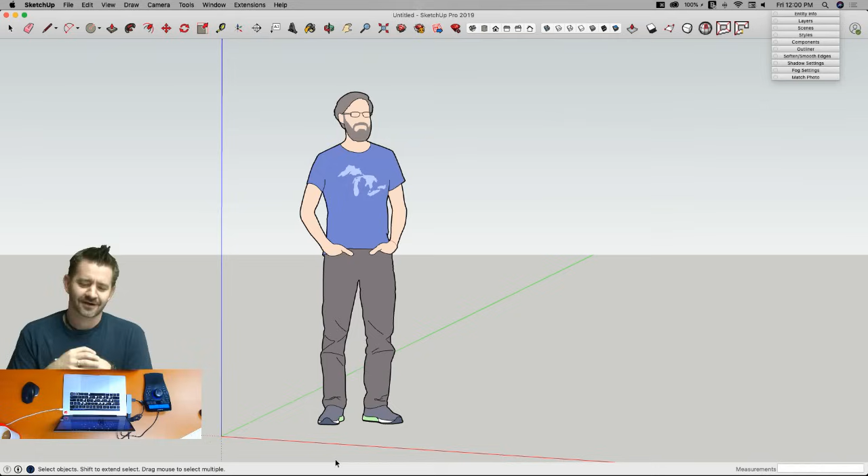Yeah, I did my best to. You guys have been around for a little while, know that we used to do this with Matt, who is actually on right now, so I'm gonna make him blush. Our video Superman, he would set all this stuff up for us. I would just walk in, plug my laptop in, talk a couple times so we could check levels, and we'd be going. Now I have to come in here two hours before and set up all the stuff Matt did, and I miss Matt. We all miss him. Yeah, and then I managed to accidentally break YouTube streaming, so I don't know what I did. I did something so it stopped streaming to YouTube for about an hour, but it's back running now, so that's the important part.

Awesome. So, hope everybody's doing good, this is going to be fun. We're going to do some stuff now. Today we're going to talk about furniture. It's a pretty broad topic, so I'm going to need your help. Furniture can be actually, so here, let me just show you this.

I did my research, and I went in here, and I searched furniture on Google, and it turns out there's lots of pictures of furniture up on Google. Apparently beds and couches, those are furnitures, tables. There's lots of things that qualify as being furniture.

So what I need you guys to give me some input is what type of furniture we should do. My thought was kind of a woodworking thing, and I don't know if you guys saw the thumbnails. We grabbed some cool shots of some different types of furniture, some stuff that was like wardrobe or desk, something with some ornamental woodwork on it. That was kind of the direction I was thinking, but I wanted to hear what you guys think.

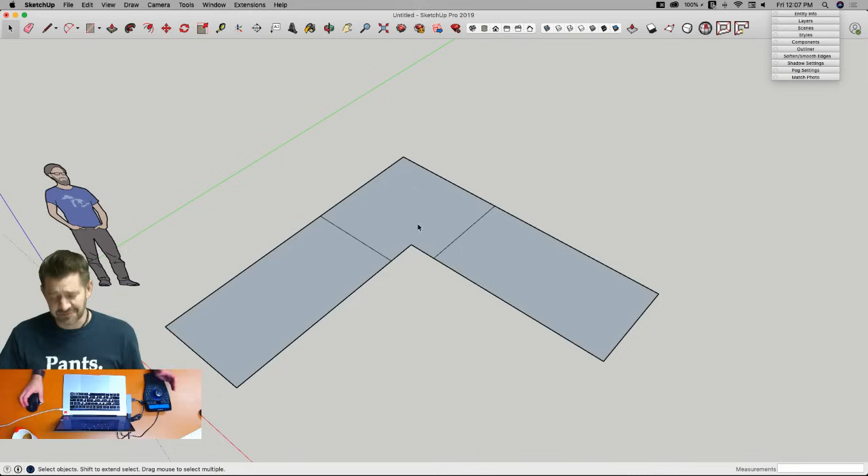So I'm going to start by getting my arc in here because I want to get this a perfect circle. So rather than using the standard 2-point arc, which is the default, I'm going to use the standard arc and inference this point to do a perfect arc like that. Then I'm going to use that command again to grab those same points and again do that arc. So that's my middle section.

All right, I'm gonna double click right here and I'm gonna start by making that a component. I'm gonna double click over here, make this a component as well. And I'm gonna call this my side section.

And, because I wanna try to do things a little different than my standard workflow, I'm gonna save this to my desktop as - think outside the box - I'm gonna call it sofa.

Nice, yeah, I try. All right, so that means I'm gonna get rid of this over here. I'm gonna take this piece and make a copy. Now, I wanna be very conscious of how I make a copy because I will have to rotate 90 degrees.

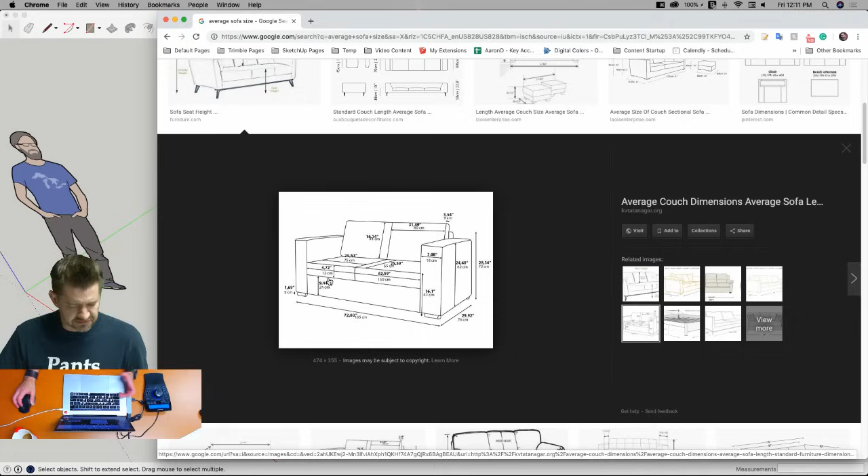So I'm gonna say the bottom section is about 9.5 inches tall. That seems about right. So I'm gonna come in here and push this up 9.5. I'm gonna double click into this one, bring it up instead of down. All right, so got our sofa started.

Now I'm gonna double click or triple click this because I'm gonna make this a separate component inside the component. As I go through and build this, there's actually gonna be separate pieces that make this up. Depending on how I put the whole thing together, cushions might be separate, the arm might be separate from the seat, separate from the back. I'm gonna want control over how that geometry grows, because SketchUp is gonna try to stick together whatever geometry connects. So I'm gonna do my best to isolate these until there's such a point where I want them to join together. So I'm gonna take this one and say make component, and I'm gonna call it the...

Bottom of side. It's like secret code. I know what it means. All right, so that's what that's gonna be for right now.

Let's check my dimensions again. So the overall height up the back is about 28 some inches, minus 1.5 inches or so for legs. So I'm just gonna draw a reference line here and go up 28, and draw a rectangle on top of this piece. That is, oh, you know what? This doesn't really make sense because I didn't actually set a size for any of this other stuff. Got a little ahead of myself.

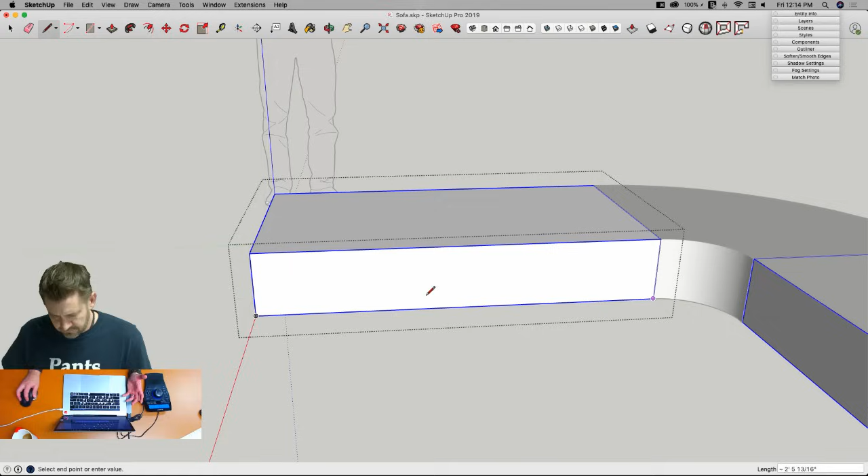All right, so there we go, so now we got this the right size that way. Length this way, again I just kind of arbitrarily made something a certain length. So this says it's about 6 feet. I have it at 4'9". Let's go ahead and make it an even 5 foot. And I will come in here and pull this out to here.

By the way, Anita says she has a lot of practice in rendering, so if we need any help, she's here. All right, I got backup.

So now we want to go up, what did I say, 28 inches? That's how big the back of our couch should be. So I'm going to draw a rectangle that is 5 feet by, here's what I want to think about, how deep is a seat? A seat is about 25.5 inches.

So if I come here, I'm drawing outside my group, so I'm actually drawing lines sitting on top of the group right now, just so I have all these reference lines sitting around outside. Once it's time to clean up, I can temporarily hide my actual groups and get rid of all these free standing lines, or use something like clean up, but I'm intentionally drawing outside of my container to create these lines for reference.

So if I make this 25, I already forgot what I said, 25.5, that's right there. So if I draw a rectangle like this and bring that straight up to here, that's the back of my couch.

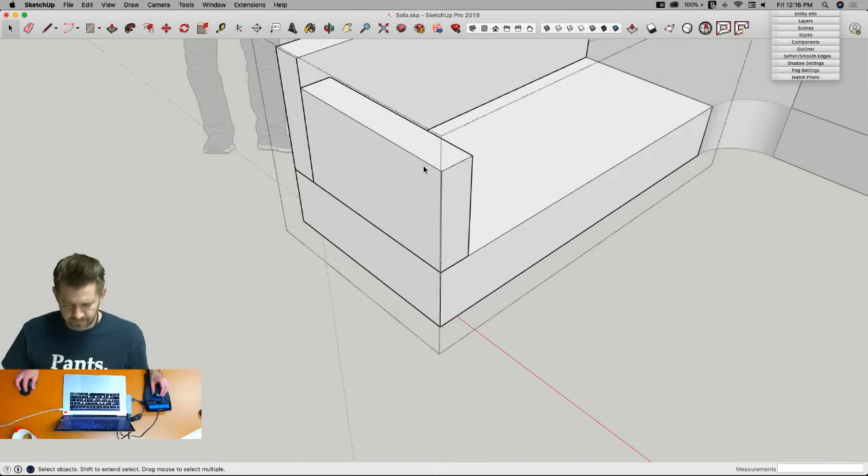Triple click, make that a new component, and call it arm. There's no arms on the middle section, so I don't have to say that's part of the side. All right, so there we go.

Now, you can see, if I come all the way out here, this is the issue I was talking about. I just grabbed that rectangle and plopped it over here. Obviously, this is not gonna work real well.

Well, actually, I've seen stupider looking sofas. This could actually work. People here face this way, people here face this way. Maybe this is like in a lounge or a public place meant to encourage, you know, I don't know.

Oh, Steven says, save please. Ah, dang. Good call, Steven, you know me so well. He does.

All right, so we got to flip. So a couple things have to happen here. One is I'm going to use move. When you use move, you get these little rotate keys. So I'm going to just grab this plus right here and flip it around 90 degrees or 180 degrees. It'll snap right there. And then I'm going to use scale.

Scale, I'm going to hold down the modifier key option and just scale it to -1. Now that is the same component, so if I come in here and start moving stuff around, you can see those two components work together. So I'm good there. All right, now everything's wonderful.

One more piece here, I gotta get it back. Looks like something's not quite lined up. I think that was all me. Everything else looks good. Everybody else lined up? Yeah.

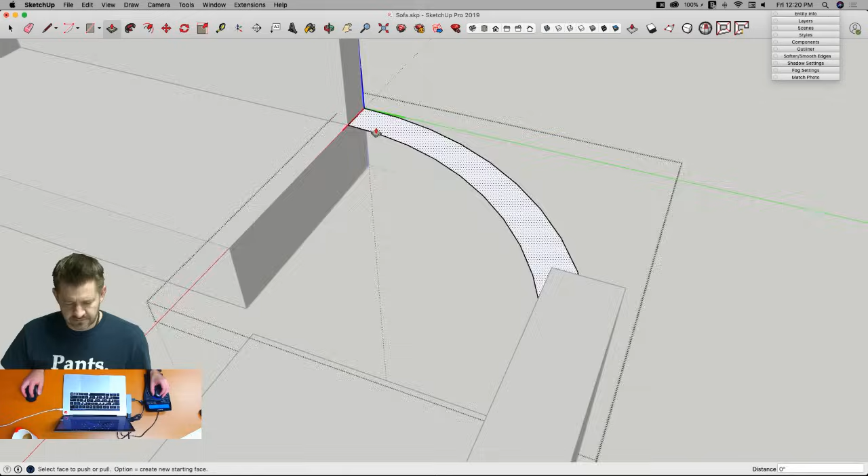So at this point, I'm gonna do this too. Oh, I have my shortcut key to hide everything else. So if I look at this welded, all the walls are separate, or all the lines are connected. So if I want to break it, I can just redraw over the end lines like this. And that will actually break. Didn't work, I lied.

If I draw lines like this, will it break it? There we go. To break that curve, because right now it's one continuous curve. So I draw those extra lines out there to break it, because I do, at this point, as I pull this up, I do want a sharp corner here and here. Not sure what happened there.

All right, so I can unhide everything else, and I can pull that up to the same height. Now I can also come in here and edit, unhide that bottom piece I just hid. All right, so now I have my basic section. So these are the initial pieces of the sofa.

So right now is where I'd make the decision of how much I want these pieces to be separate or joined together. If I wanted this to all be one piece, I could come in right now, grab all three of these, right click, and explode them. And that's just gonna give me one big piece that is the outside of the sofa. Depending what you're doing with this, that might be the ideal solution.

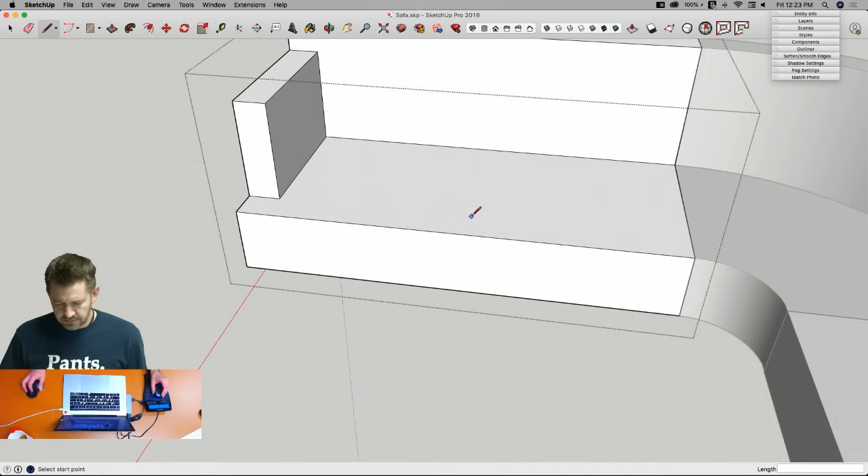I'm going to use a line on this. So I'm inside my component, again, my outermost component is the whole thing. So I'm going to click in there once, then triple click. This is all my merged geometry. I'm going to right click and say make it a new component, and I'm going to call it the side main.

I guess. And now I need to make a base for where my cushion's going to be. So I'm going to go in the middle, and draw a line straight back, and just make a rectangle like that. And I'm going to pull that up 4.75 inches, then triple click, make that a component, and call that side cushion 1.

So that's one cushion. My other cushion is going to be a little bit different shape because I'm going to use, again, just trace around the existing geometry that is grouped separately, like that. I'm going to push, pull it up to here, triple click, and make that a new component. I'm going to call that side cushion 2.

You guys probably saw that one coming, huh? I know, sometimes I get a little overly creative. All right, that looks okay. Again, we're still blocky, but I know you guys have faith. We'll get that worked out.

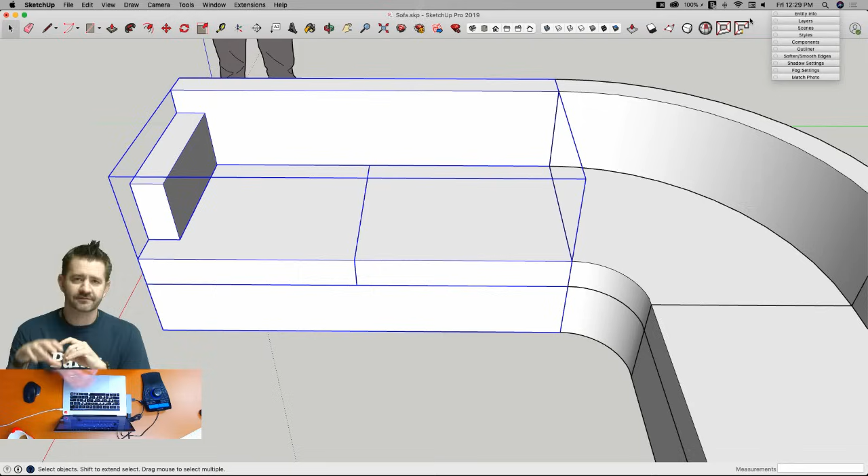I can't do that on Mac, I only have this one toolbar. So what I end up doing is putting in the commands I use a lot - my native commands I use most often, my view options, and then extensions that I use a lot. Actually one of these isn't an extension, that's push line, which lets you push-pull a line into a surface. This is just shadows on and off. This is vertex tools, sub D, and solid inspector from ThomThom, and split donut and split sausage from TIG. These are tools I end up using a lot in my standard workflow.

To be honest, a lot of the shortcuts I have are mapped to my mouse or my 3D mouse, so I don't use these a whole lot. Most of the time I use them it's because I'm doing a video and want to show what an icon looks like, like the section icon. That's another nice thing about SketchUp - you can tailor it however you want. Your UI can be whatever works best for you.

All right, let's move on. So next thing to get on here is the question of cushions. I might have separate cushions on the back here, might be part of the back, but I'm going to put actual separate cushions on. So I'm going to come into this group and start with a 4-inch cushion here, pull that up - actually pull it up just past that, about 2 inches past the back of the couch.

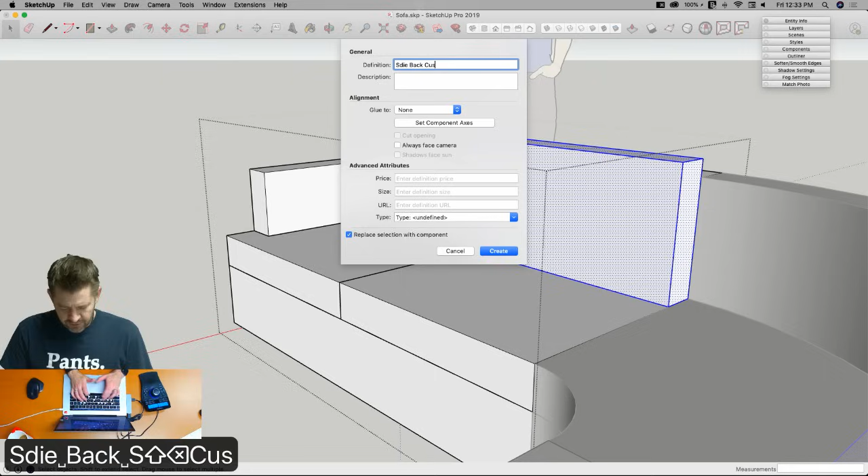All right, I'm going to triple click here, make this a new component, and call this side back cushion 1, or Sdie. I'm going to save, because I really am good at that. I'll come over here, use the side of this cushion to draw the profile of my next cushion, pull it out to the arm, and just to make this extra fancy, I'm going to draw a line right here to break that, and pull this out this way. All right, triple click, make component, side back cushion 2.

That's something most people do - toolbars are great, but most people end up using shortcuts. It's nice, especially when you're learning SketchUp, because there's nothing that beats an icon that does what you need to do. If somebody's just learning, I always recommend going to tool palettes, get the large tool set on, whether Mac or Windows, and have all your commonly used native commands right here. Once you get used to it, buttons are nice, especially with a lot of extensions, but you'll probably get used to shortcuts - assign hotkeys to whatever commands you use most often and just click those. It's hard to beat that way of working, it's a lot quicker than going up and hitting buttons all the time. So shortcut keys really are probably the way to work once you get past the startup and learning phase.

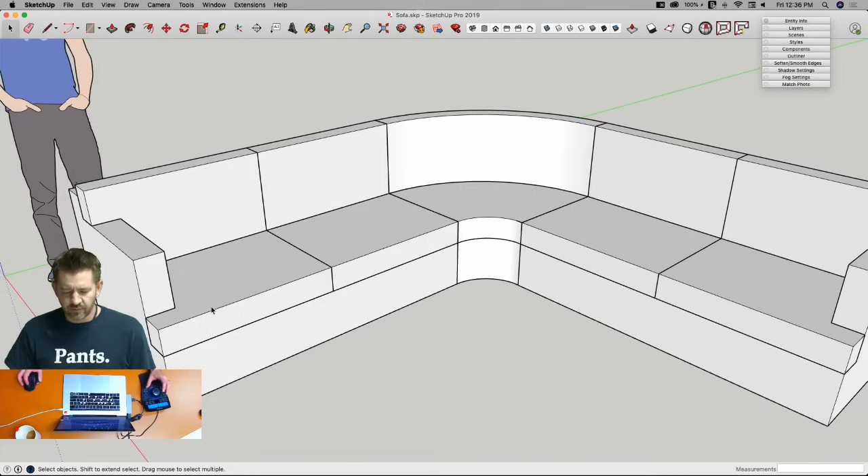So if I wanted some of this to look sharp, but I wanted the cushions rounded over on the edges, what could be good enough is to come in here with your eraser and hold down Alt or Control and just soften these edges. In some cases, depending on what you're using this for — because it really all depends on that — that might be good enough. See how I got that kind of rounded edge? It's not good enough for us, but depending on what you're using it for, if this cushion or this couch is going to be seen from right here, that's probably enough. I probably don't have to add a whole lot more geometry to this if it's going to be the size of a thumbnail on a drawing.

So I always advocate for modeling for whatever you're actually using.

I'm going to undo a few times to get our edges back, and now we're going to actually go in and talk about some extensions. I'm going to go up here to View, Tool Palettes, and turn on Fredo Corner — it's called now. There it is.

Fredo Corner is an extension from Fredo6, the extension developer, and what it does is it takes geometry and, like it says, rounds the corners. Natively, this is something you'd probably do with a follow me tool or something like that, where you take a round profile and use it to subtract from the geometry of the cushion, and that works. But it gets more complex when you're looking at corners. Like this right here, if I did a follow me around this corner, I'd cut that top corner off real nice, but bringing this corner down and softening that also becomes more work. So you end up having to delete geometry and maybe draw new geometry, create a bunch of pieces, stitch them together, or even end up lofting the corner together, something like that. So we're going to keep it simple.

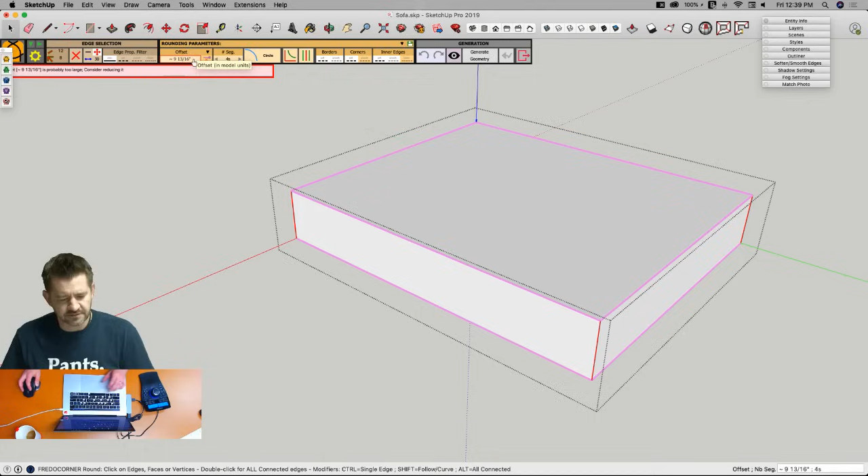And it's going to ask me now, how far do I want to offset it? Right now I'm offsetting 9 inches. That's too far. So I'm going to try 1 inch offset and see what that looks like.

We do have some options in here, number of segments I want to generate. The more segments I put in there, the softer and rounder that corner is going to be. Right now it's going to do 4 segments. That's fine for what I'm thinking I'm going to use this model for. If you know for a fact that you're going to do some high quality renders, like product visualization, you might want to go for higher than that, but that's your call.

There's a bunch of other stuff in here, honestly, there's so many options that I have a hard time remembering what everything in here does. So if you do want to use Fredo Corner, go ahead and give it a shot and try some of those different buttons and things. Right now, I'm going to go with just the standard default information in a round corner.

So we have a couple of questions about leather. Can you add texture like leather to this? Yes, absolutely, short answer, yes. You can add a texture of anything you want to add. I always recommend, if you can, getting a seamless texture, because then you can tile it and resize it to whatever size you want. If you can't get a seamless texture, then get a texture of an image that is bigger than whatever you want to put it on. So here, if I wanted to make this a leather texture, I'd want to make sure I had a piece that looks good when stretched larger than this piece right here.

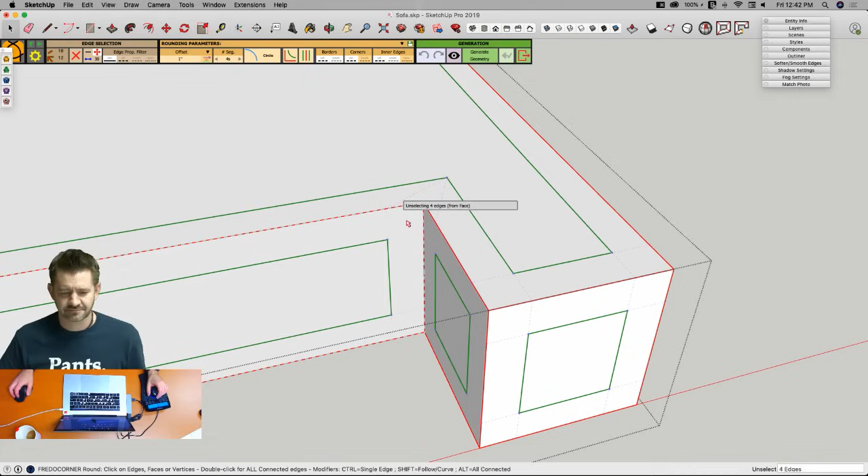Manually going through and connecting how these multiple... we keep flipping to offline on my screen. That's weird, we losing the internet? Is anybody else, am I disappearing, or is Restream just messing with me? Looks like we're still online everywhere, but Restream keeps telling me we're offline. You guys are still talking, so I assume it's not too bad.

According to Twitch, we are good, we are live, okay, and YouTube. See, Facebook up, Facebook's still good too. All right, I'm just gonna keep going.

So this is not the most beautiful here. I'm gonna look at my hidden geometries to see. So it's not bad, it's not a bad geometry, but it's a little bit chunky. What it's doing is kind of trying to soften that corner, again, with all the different sides coming together. So I'm gonna leave it, I'm gonna see how it interacts with this once I soften this too. But there we go, that's looking good thus far.

I'm gonna do the same thing to these top cushions. Just triple click, round corner, good, exit, triple click, good, whoops, triple click, click, click, now good. All right, so those look all right.

Now I'm gonna come into this piece right here. I probably wanna be a little bit more selective, I don't wanna soften everything. So remember, if I triple click, I'm just gonna do it. I'm gonna say, go for it.

So what it's going to do is on all these inside corners, it's going to come in and soften them, cup them together like that. My outside corners are all going to be on the outside. So the question is, where do I actually want to soften that geometry? There's some spots I probably don't want to do that. Inside corners I probably want to keep sharp, since they would actually fold inside.

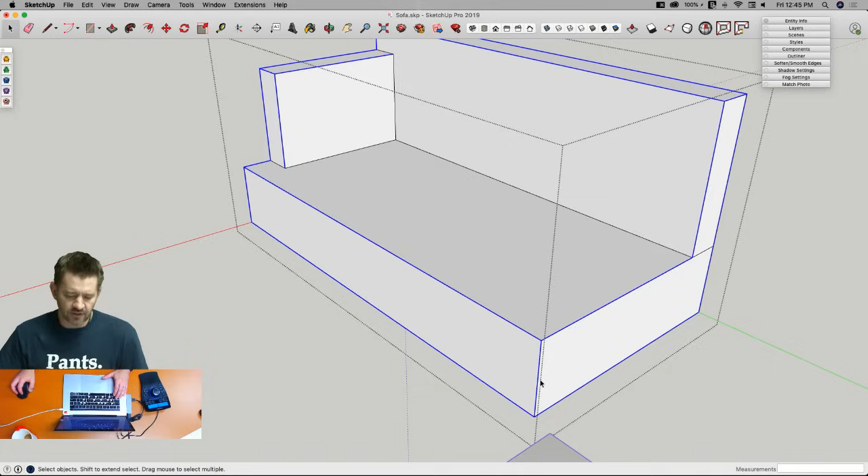If this is all one piece, I may actually want to turn these off so it has a nice, smooth, flat connection with the corner piece. So I'm going to turn those off. And I'm actually going to turn the bottom off too. I want it to be totally flat on the bottom.

I don't know what I'm doing. We got another celebrity status online. Don't get too nervous, Aaron. It's Josh.

Great, all these guys are going to tell me what to do.

All right, so now that I've filtered my selection, I got my inside corners turned off. I got my end and bottom turned off. Now I can hit round corner, and I can view again so I can see where it's going to round the corner. So this front corner will be rounded, and this will be rounded up here.

That looks good. I'm going to go ahead and hit it, then exit, and click out to see how that looks with my cushions. So yeah, I kind of like that. I like the way that looks. So round corner rounded this piece like that, but left it flat on the bottom. I think that looks good.

If I want a little bit of a lip under there on the bottom, I could come through, click in here, and do another round corner, maybe rather than a whole inch offset, do like a quarter inch or something, just to give a real small, tiny lip. Something like that could work, but I'm going to go ahead and leave mine just flat.

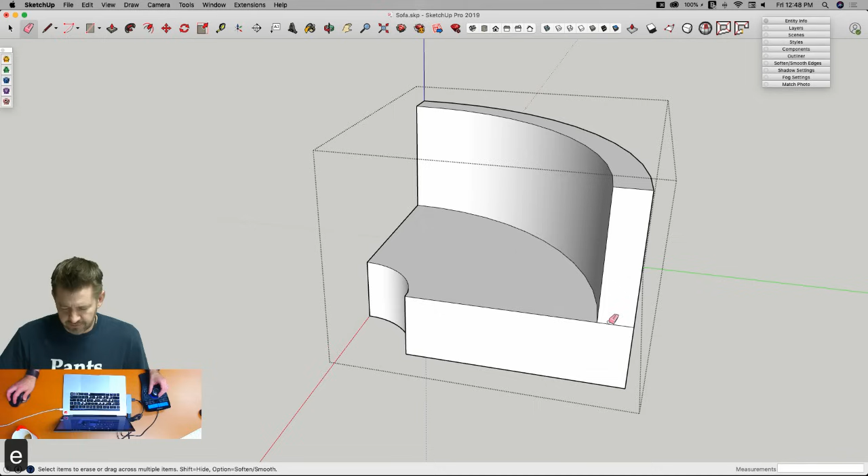Leave that, and I'm going to go into the geometry here. I have these extra lines I forgot to delete out. Actually, I'm not going to triple click because there aren't that many pieces that are softened or going to be rounded over on this one. I think that's it, just those pieces, so I can just select them instead of doing a big group select and deselect.

All right, what's going on here? Oh, I must have had some loose geometry somewhere. I rounded the corner, pulled back, and left that piece for me.

All right, so that is our about an hour sofa. No, not even, sorry, about a 40-minute sofa.

So I know one of the questions was about materials, how do I put materials on here? So let's take... oh no, I'm sorry, I forgot the cat toy and change storage. That's the most important part, right? The couch - oh look, I got the extra line here too.

All right, so we'll come under here, and I'm gonna draw just basically something pretty simple. Let's see, I'll come across from here to find where those two meet, and I'm gonna draw a 3 by 3 inch square, which I'll pull down to... what's my reference photo say for that? All right, so we're gonna say 1.5 inches.

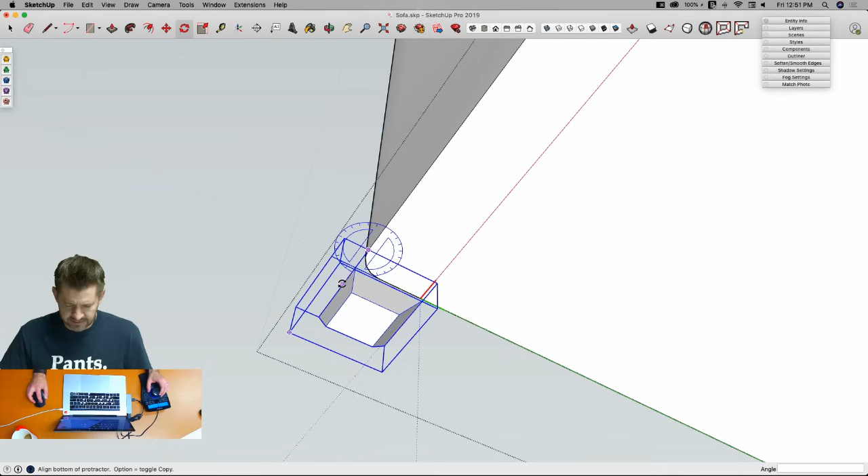And I can take that, and I'll use Move, Option to copy. I'll put one right here, and then rotate that 90 degrees. Grab both of these, copy over here. This is another one of those spots where there's probably a dozen different ways I could copy these feet over.

But that's my 4 feet. I'm gonna come in here, grab one - I have to Control C. I can't use modify or the move key to put it on the other piece, the middle piece, because it's out of context. So Control C to copy.

Then when I click into this, I can hit Control V to paste, and now I can grab it by those handles. There we go, stick it right here, and rotate it 90 degrees there.

Right here, and I can take that, of course, rotate that 90 degrees. And one more - actually, I wonder if we would want a 5th foot on the back here. Is that gonna be tippy? I'm gonna tip back. We'll throw a spare foot in just for fun.

Grab this foot, I'll grab it by the outside corner. I'll go find the middle of this arc, and I'll rotate it, let's see... oh, 90 degrees. So there's some feet - looks good.

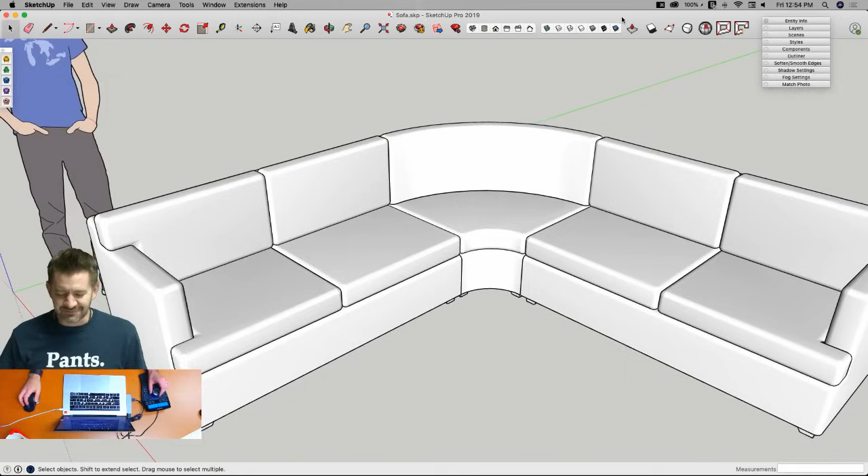But we'll go look at some tufting, because if I was to do that, here it is. I gotta talk like I'm not making excuses while I make an excuse.

Absolutely, that would be awesome. I wouldn't want to try to do it on a round thing like this on the fly - I would have to spend a little more time. But we'll make a separate cushion, a nice pillow that has a button in the center and some tufting. Perfect.

So the other thing I want to talk about is how to put materials on here. There's a couple ways I could do this. I'm gonna get down to the surface level. I don't want to apply materials to a container or a group on the outside. When I apply materials, I want to apply it to the actual surfaces. It will let me take the paint bucket and apply materials onto this surface, but that's not what I want to do.

What I actually want to do is apply it to the surface here. One of the big reasons is we're going to go in and modify and edit the texture. You can't do that when the texture is applied to an entire container. There are other downstream parts that can bite you, but the most upfront issue is I can only edit textures if they're on a surface. So that's exactly what we're talking about right now, editing textures.

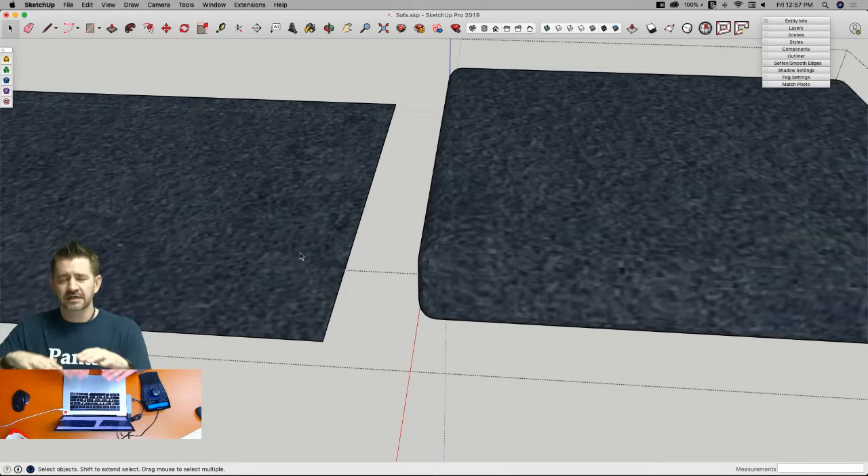This is the issue. What happens by default when you grab a bunch of surfaces and hit paint bucket and drop it on there: it takes that material, puts it on one surface, then goes to the next surface, takes the material, puts it onto that surface, and works its way around the facets, like the rounded corner. Each surface gets its own separate one. So each time it does it, the texture starts over, moves over, starts over from the same spot. You end up with jagged looking chunks going down the side.

Not ideal, right? So what we can do instead is take this material, right click, texture, and call it a projected texture. A projected texture behaves a little differently, because rather than each facet on a curved surface getting its own, like an image on a projector, it actually casts it from one direction. Watch what happens.

I'm going to triple click again, hit B for paint bucket, sample this projected texture and apply it here. This is a double-edged sword, which we'll see right now. You can see, looking at it from this side, it's the same texture all the way. But what ends up happening is on the vertical side, it's stretching it—projecting it vertically down—and it ends up stretching down like this.

So in some cases, depending on your texture, that might be okay—I might have a texture that actually looks all right with that. Oh, this texture looks terrible. Oh, that looks horrible, like an asphalt couch. Yeah, I don't know about that, but we're gonna roll with it though.

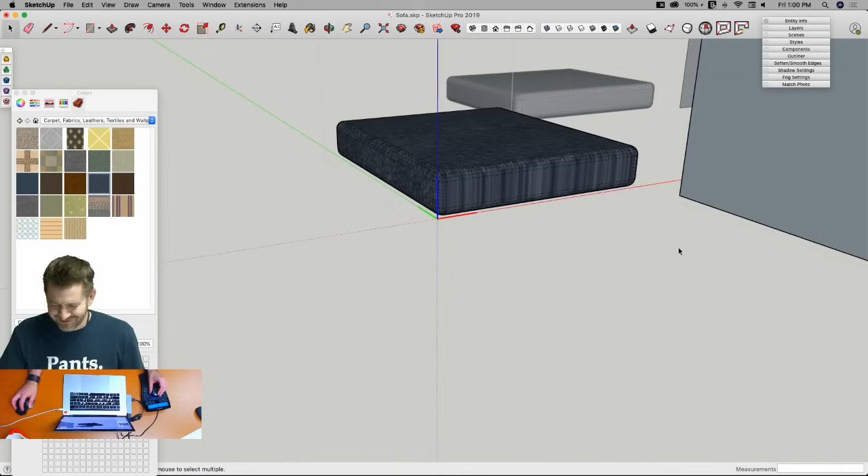Come over here—nope, didn't last too long. So I could add this to the front and back, something like this. Again, this is all in lieu of going and finding the right texture and bringing it in. I'll grab this one right here and turn it this way. It's a new trend—the asphalt couch. That's right.

I'll pick this again, and I'll apply that to this side, and this side.

So you can see when you're done with that, turn off hidden, it's better. Not ideal. This is a hacked together example.

But if you really are concerned about getting those nice flowing geometry around, what I would recommend is taking a look at some of the UV example or UV extensions out there. SketchUV, Wrap-R, I'm missing one. I don't remember what the other one is. Somebody remembers, Dave probably remembers. Yep, there's a third one that will allow you to actually project one surface normally along all those surfaces.

In this case, yes, Dave pointed that out too. I used a very large texture. What I probably should have done to start with was take this texture, used position to, wow, that's huge. Start by just shrinking this way down so it looks less like asphalt and more like actual suede. That looks softer, see, that actually looks kind of nice. That I can get behind. That looks comfortable, far more comfortable.

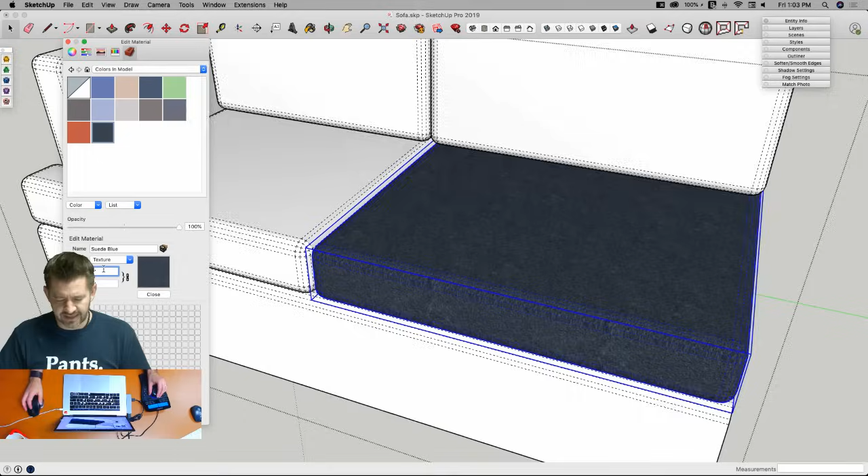So that's easier. For those of you who missed that, all I did was take the material, double click on the material right here, and globally throughout the entire model, wherever this material was used, I scaled down how big it was. So rather than the swatch being 5 feet, it came down to 1 foot, and it gave me a much more suede-looking than concrete-looking couch. So soft-ish looking. I turn off hidden, and that looks all right. I'm good with that.

So there's a couple tips. I'm trying to think of an easy, quick way to reapply that to everything without going through all that. So I'm not gonna, I'm gonna leave it as it is. But I do like that idea.

We're gonna take this model and we'll do a couch customization. Maybe we'll make it even more than that, maybe we'll challenge you to build a living room or something around this couch, this centerpiece. Like a whole set, a table and a chair too, maybe? Yeah, this is gonna be up to you.

I'm gonna take this though, sorry Mark, gotta go. I'm gonna take this sofa as it is right now before I do anything else, and I will throw this up on 3D Warehouse, and we'll tag it with something clever and witty and hashtagable.

We have to search for it first, because last time I saw, best bus ever, who's gonna tag that? And that guy had that drawing of a low poly city that was tagged as best bus ever from like 2 years ago. So, gotta do a little research, is what I learned right there. But we'll throw this up there and we'll do a quick competition and see who can make the coolest living room with our live modeled couch as the centerpiece.

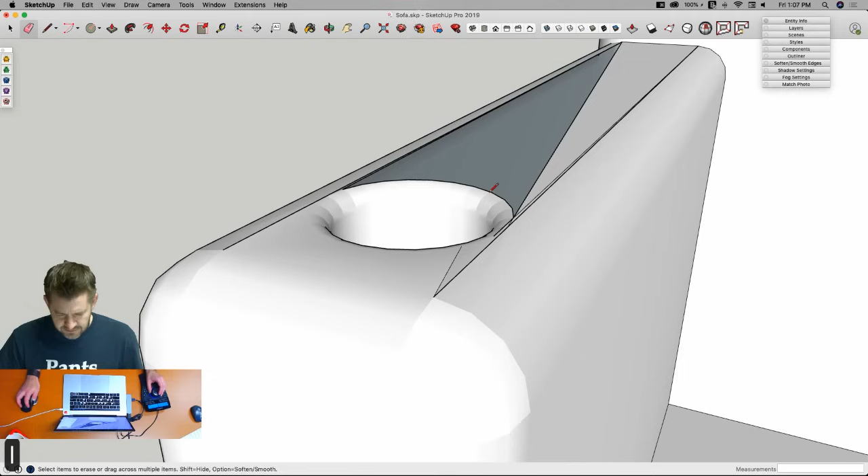Is that just extra geometry? I might be able to clean that up real quick. Sometimes Fredo Corner gets a little excited with the geometry and ends up with extra stuff that I don't really need. I'm not sure why it tied everything back together like that, but fortunately... see, that's what happens when I decide, hey, this would be a fun thing to do, let me just do this real quick.

And then, live, the whole idea of being live is like, that's not what you're supposed to do. And it reminds me, oh, I see what happened. Wait, undo, undo, undo, undo, undo, undo. The problem was, grab that again. My 1/4 inch hit right here.

See those little blue dots? That's where the edge is actually lapping into the corner, going over like that. So I could probably just take this down. Ian says if you reduce the offset, it should work better. Let's try 3/16. There we go. It does do this when you create a circle sometimes, where it will go fill the face in or something.

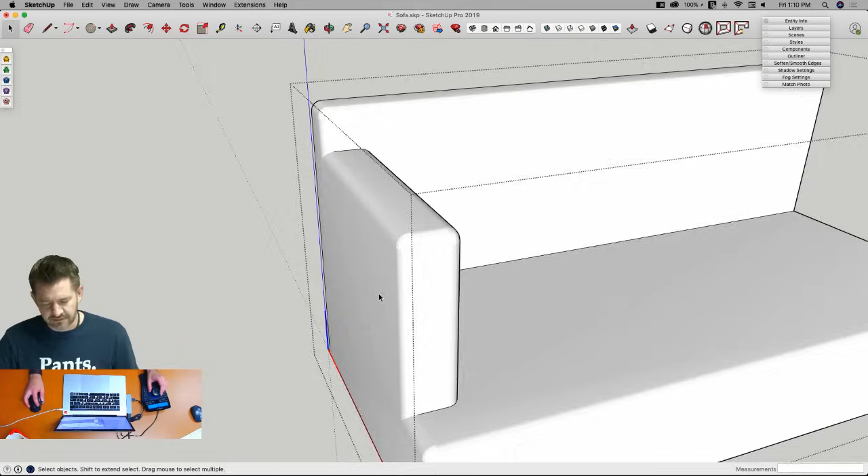All right, so if you do want to put cup holders in here, you're going to have to make it wider. Just to throw out a tip, something to think about there: if I wanted to make my arm wider, it's hard when you have geometry like this where everything's hidden, because it says this is all one big surface. What you can do is turn on hidden though, and then you've got to get good at your selection, but I can select everything that's on this face like this, and pull this over, so I want to go over 2 more inches to make that wider, to give me a little bit more space there.

Same thing here, I could go to this cushion, grab just this geometry, turn hidden on, and slide that over 2 inches. Same thing up here, if I wanted to. That way, from here to here, it's 4.5 inches, so I actually have the real estate to put a proper cup holder into that arm. So, something to think about as we launch off into this next effort.

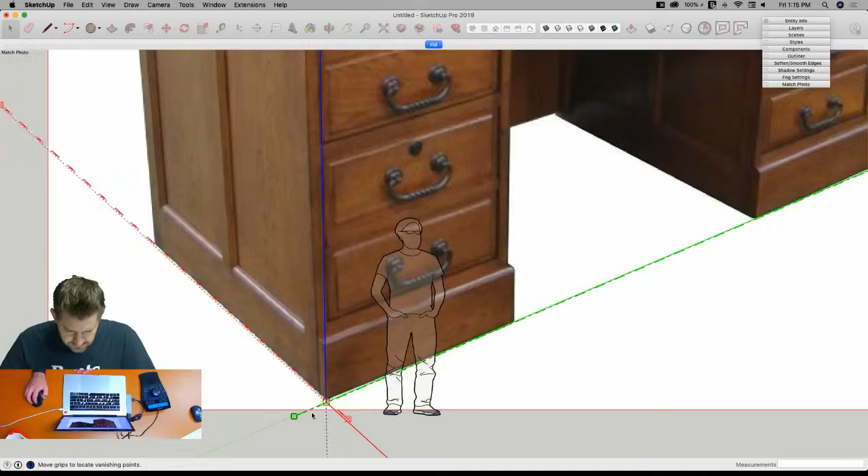You can tell I'm concentrating, guys. I can't talk and align axes apparently. I gotta focus. No multitasking.

Focus hard, that's right. And you see there's a little bit of distortion on this drawing too, or this is wood and it's old and it's no longer perfectly straight. But this straight line, this green axis hits the corner here, and look where it is, it's on the inside of the leg here, and same thing, inside the leg here and then back on the outside corner. So it says that the image is maybe a little bit bowed like this, which could happen. But again, I don't know how new this is, it may actually just be a little bit not perfect.

I'm getting the same kind of thing. You can actually see, look at this reflection line right here, see how it actually kind of comes up and bows up and then comes back. So I'm guessing this is a little bit out of plumb. They probably didn't take this picture intending for me to use it for this. Rude. But this will be good enough for what we have to do.

What we have to do is just get the rough geometry of the legs, the top, get all that in there. This is plenty for that. So with that done, I'm going to go ahead into Match Photo, and I'm going to say done.

It's big, sorry. As I hit done, I realized, look at a little mark down here, little under the King Kong desk. That's all right, we'll be good. All right, so I'm going to click right here and get one leg in.

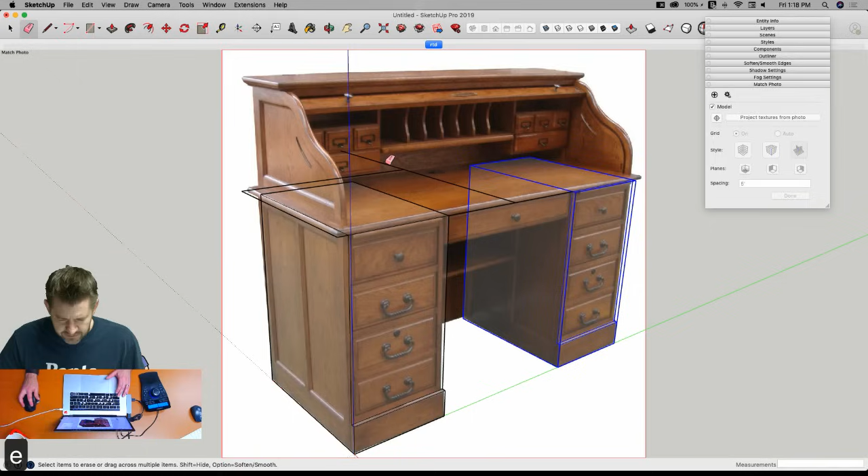And I'm going to come in, I'm going to do this. I'm going to put a line from here to here, and that is going to be my middle line. This is absolutely one of those situations where I don't want to model more than half of this.

All right, so something like that. Actually, I'm going to probably pull this front out. Oh, this is probably further back.

So that needs to go up a little bit higher to match that, which means I have to grab this and pull it up. I'm not messing with this one over here because, well, I'm really not worried about it - I just put that in for reference temporarily. Now I'm going to have something like this. There we go, and I'm just going to temporarily chop it like that, give that a little bit of width.

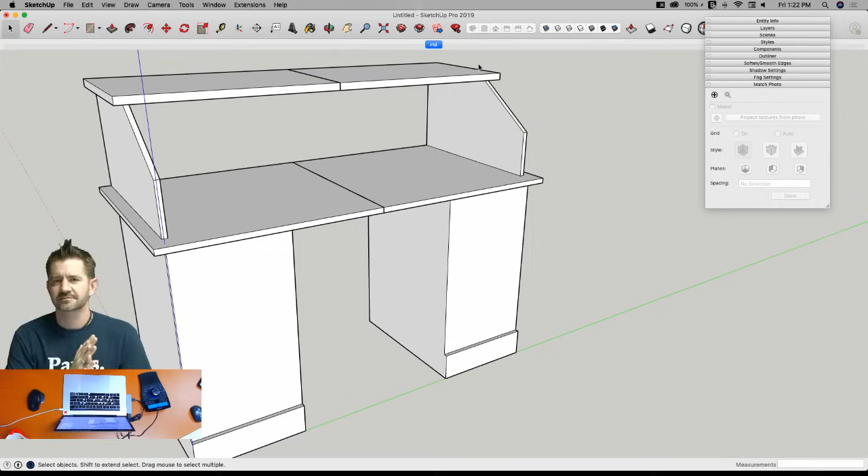Totally not going to Google tambour on my phone right now - I'm going to look that up real quick. I should probably know what that means. Isn't that an instrument? That's what I thought. Oh, there's a circular frame for holding fabric taut while it's being embroidered. Still don't know. Well, that clears things right up. It's tambour, the roll top - thank you, Dave, you're right. Well, I guess fabric or something like that could be the back, right? Isn't that how that whole roll top thingy works?

Yes, let's do just that. So I'm going to grab these pieces right here, explode them, I can get rid of some of this geometry here. This is going to be, like I was saying, my reference group, just to get me a shape. So I'm going to make that a group.

What's an average desk height? Who's got a desk height? Again, I know it's 4 inches above my leg when I sit in this particular chair, but who knows what this dimension should be right here. Looks like 29 inches maybe? Is that too tall? 30 - yep, Thomas says 30, so we'll go with Thomas. I tend to trust Thomas in times like these.

All right, so grab this, click, click, call that 30 inches. Yes.

That seems... Pando just measured his own desk for us. Thank you very much. So yeah, according to Mark, this is an acceptable size for a desk. Thank you, Mark - that's all I'm going to ask of you today.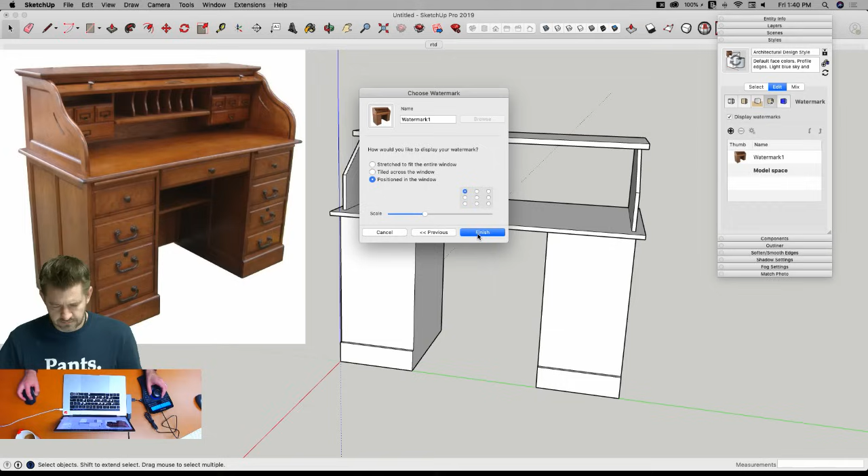A little smaller. Coordinate that with my head. There we go. All right, so now you can see everything.

Okay, so now I'm just going to use this as basically a reference. I'm going to start at the top and work my way down, because I really want to spend time on this top section. So I might start with this right here.

Let's see, how big did I make this? So it's approximately an inch. I'm going to come in here and draw something that's exactly an inch. I can see the difference, so that's where I want it to be. Just pull this here, give me something to snap to. All right, so now it's exactly 1 inch tall.

It looks like we have a little bit of fanciness going on here, where there's a router going around the edge. So I'm going to come on to the end here and add 2 separate reliefs. One's going to cut back like this, and another I'm just going to knock this corner off up here, something like that. I'm not going to do it with straight lines though.

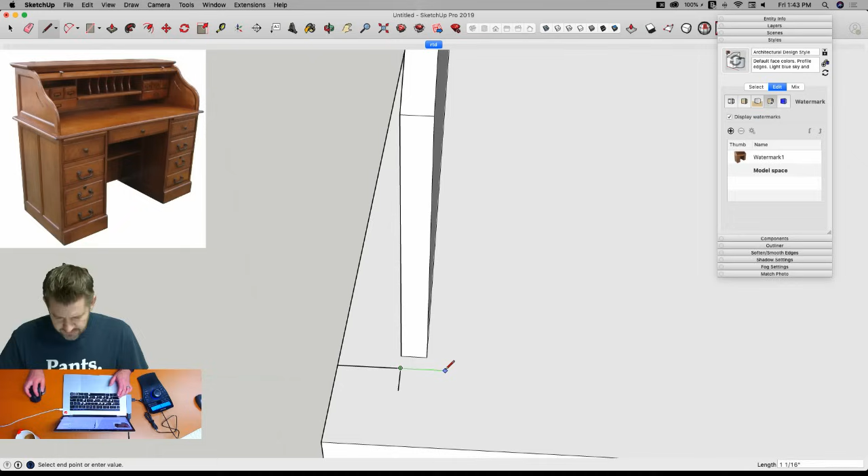And from there, I want to go some 5/8 inch material. Grab this, I'm going to shift it to here. And then push-pull that out to here. And some of you will remember I said I was going to model half of this, and that was my intention, so I'm going to break it in half right now.

Probably should have just done this from the beginning. Just gonna draw a plane like that. There we go, let's grab that. Intersect face with selection, that'll break it, and then I can just grab this half and delete. Sweet, all right, there's half of it. That's gonna save me a little time.

I'll probably do some pieces like the roll top separately because I want it to all be one piece and I don't want to have to go in and join stuff together. So I might do that separate, but for right now, this is gonna work.

All right, for one thing, this actually needs to go back quite a bit, so I'm gonna temporarily delete this. Slide this back like this. And then what actually happens is I'm going to take this face out like that, and I'm just going to get a full size piece of material sticking out.

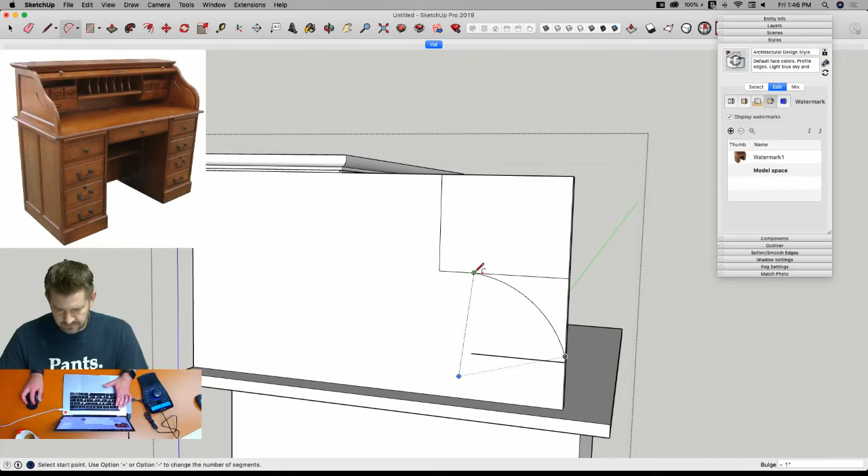Again, these lines are just kind of reference. I don't have to stick perfectly to them. I'm using that 2-point arc right now, so something like that.

I'm gonna take that, push that through to get rid of it. Sometimes, this is something else you may hit every once in a while, I got a little bump coming out here. Because I have segments and can come back and weld afterwards, I might just knock that corner down a little bit, and then hit Alt and clean that up.

The other thing I could have used there would be that thing I just spaced on - the Bezier curve, to go through and give me a little bit more control over those rather than using arcs. Arcs is actually kind of a clunky way to do that, and I ended up with not a very good looking arc right here. I may come in right now and put a new arc right here. See how that looks. No, that looks terrible.

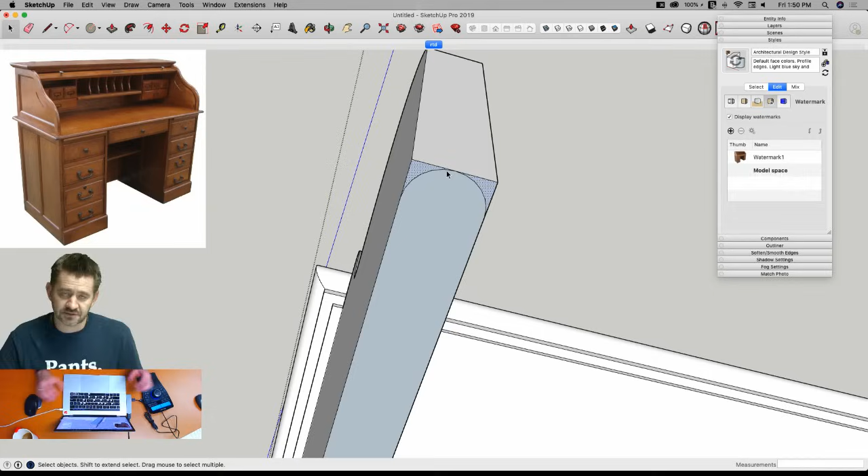So what I'm going to do is come down here a little ways away from the corner, and do an arc like this and pull it out till it snaps to a half circle. Then I'm going to grab that half circle by the end point and slide it up, boom, to where it hits that piece. So what I just created was - I still have the half circle I'm still going to subtract, but I'm all the way up against the edge.

You know what? Guess what I didn't do before break? Save? Oh yeah. So we're going to call this the desk.

Here's what I'm going to do to select the edge. I'm going to double click here to get the whole surface, and then just come back and turn off geometry. I see a lot of people spending a lot of time going in and clicking little tiny geometry to make their selection. You can do that, but if you could select a bigger piece and just turn off the pieces you don't want with a few clicks, that's definitely a better way to do it. So just some food for thought.

The other thing I'm going to do is while these lines are selected, I'm going to go into extensions and hit weld. That weld gave me all of this as one line. So now I can come back, reselect those two pieces, grab follow me, click right here, and there we have it - get rid of that little geometry. There's our nice soft curve.

All right, save. Not really sure how this melds in up there, but maybe what I'll do is just push pull this all the way back. Ooh, that's not straight, that's why it's not working. Okay, or I won't. Oh, that's a little bit angled.

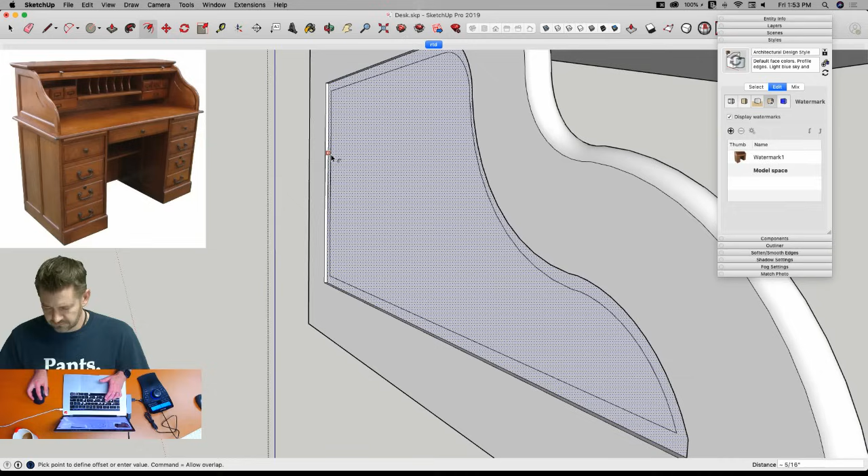One thing you could do is we have 5/8 of an inch. Say I want to push it in 1/8 inch, and then we'll offset and pull this in, let's say 5/16 inch. And then I could take this piece right here and move it along the green axis, not that far, a little offset like that, and create, and then come in here.

I might have to do a little bit of cleanup if I did something like this. But I could actually go in, something like that, and what that ends up creating is kind of a straight piece and then an angled piece happening in there. That's an option, that's a way you could do it. The other option would be to offset and just push-pull to give me a stepped relief in there. That works also, that's real easy to do.

But we're not going to do either of those. What I'm going to do first is some more welding. Weld, if you're looking for an extension to start with and have never used an extension before, like Michael just asked, go grab Weld. There's actually a couple different ones - I think there's SU Weld, and I think TIG has a TIG Weld.

What Weld will do is take these disparate sections - each of these is a separate section right now. If I select all of them by double clicking on the surface and then shift clicking to turn off the surface, now I have just these lines. I go to Extension and hit Weld. It'll make all those pieces one, and that way when I do a push-pull, I get one nice soft curve all the way, rather than what I had before the weld, which was this right here. I'd have to go in and do an eraser with a modifier tool to smooth that back out.

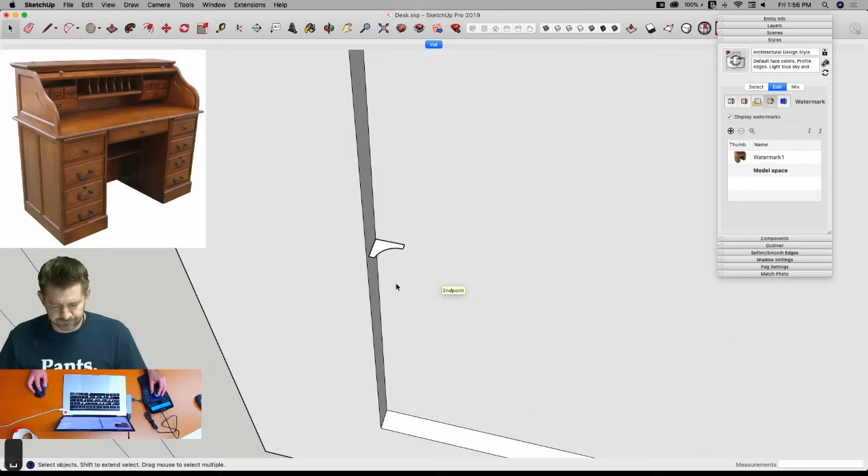I am going to go in and sharpen up a couple corners. These actually don't want to be smooth and welded, they want to be sharp. So what I can do is come in here, perpendicular to one of the lines - this is a perfectly vertical line - so I'm going to build my profile here on the wall. I'm going to come over a couple inches like this, and then maybe I will come out like that, and let's do fancy like that.

All right, so I want to take that profile now and trace it all the way around. Select that, and then Follow Me, click that, and then I get that. That's a nice, simple, one-click profile in there. You can see that - kind of a quarter round.

Leo said when you did weld, you forgot to deselect the surface. That's true, I did not deselect the surface. It still works - when you click Weld, it disregards any surfaces selected and only looks at the line segments. I did call out that I was turning it off for clarity the first time, and then didn't do it the second time.

So you got me, you're right. All right, so I have a couple pieces to clean up right here, but you can see this got a little ugly. That wasn't quite big enough to make it - I'm going to undo a couple times. That wasn't quite big enough to make it around this corner. This corner is only 3/8 of an inch.

So build a new section, one that is less than that. The nice thing about SketchUp, you can always undo and try again. Undo is one of my very favorite commands, in case you guys did not pick up on that. Me too.

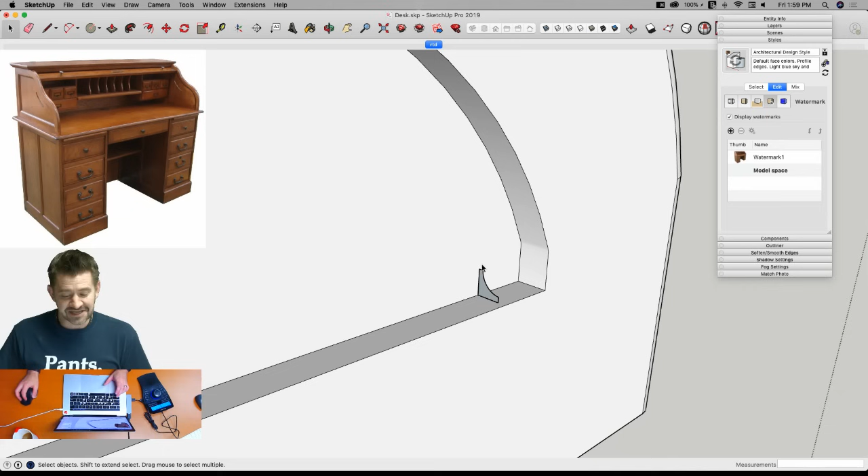So we have a thing referred to as the Dave method. Dave's getting a lot of shout outs. I was gonna tease him a little for being really good at modeling woodworking while I was gonna hack at it, but, celebrity status.

So what we can do is take this surface and make it a component. This is a temp component. What I'll do then is take a copy and just copy it out. Now I'm going to scale it up by 100, so I have that exact same geometry, just way bigger. I scaled the outside of the component, not the geometry on the inside, but the component itself, so it's all the exact same geometry as down here, just 100 times larger.

What this lets me do, hopefully, is select this, follow me, select this, and give me a better result. Didn't fix it up completely. Let's go bigger. We'll go even bigger, I don't care, I'll do it. Let's go another 10 times bigger.

And when I broke that out, I broke my weld. So I am going to re-weld that. All right, now we'll say follow me.

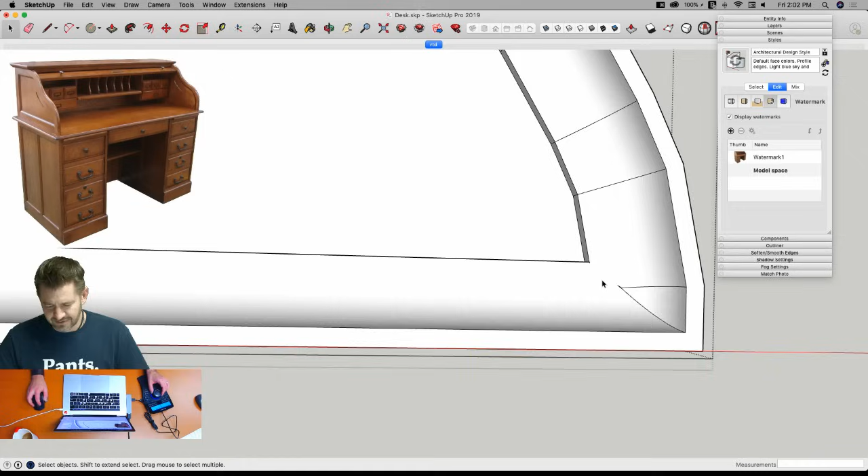All right, I'm gonna modify my path. Re-weld, let's see how this goes. And, boom. Not better. All right, so it wants this to be smaller than this piece actually, so yeah.

This goes back to the beginning, where I messed with this a little too. Okay, back it up, back it up, back it up. All right, and of course now that I've gone and done all this, there's no way this is gonna look stupid. All right, I'm gonna fix stuff, I'm gonna make it work. Don't y'all worry, you can tell you're worried, so worried.

All right, I'm gonna go. There we go, I think that will probably fix our problem. There we go, but I unwelded.

I'm turning off these pieces because I don't want my 90-degree chunks to get welded too. All right, there's just that, and then I'm gonna turn off this and this also, and re-weld that. All right, now I can select this, follow me, click this right here, and we have something that looks good. All right, so we don't need you anymore. We dabbled with the Dave method, but it wasn't what we needed at the time. All right, so there, we got a good looking relief right there.

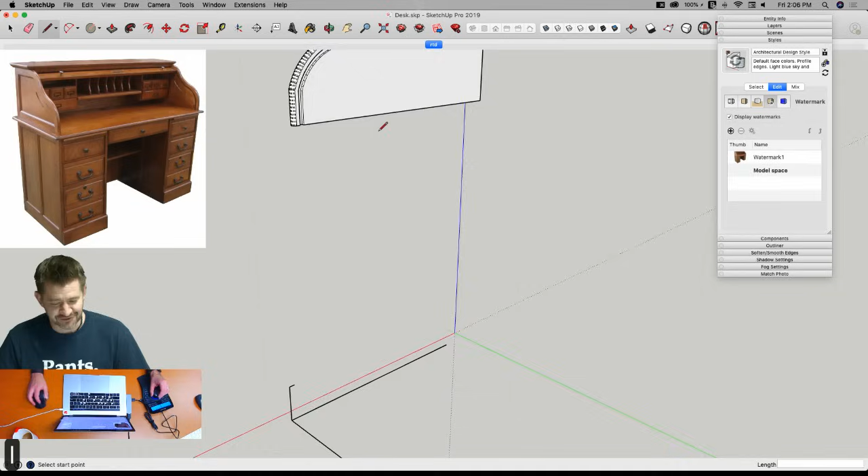Starting from scratch. All right, well, I know where my foot was, so that's something.

Sometimes when you start talking about things, you lose track of what you're actually doing. That's okay, Dave will keep you on track. That's right, thanks, Dave.

All right, so we're close to back - I mean, that was really all we had. We had a leg down there and then something representing our tabletop, but it really wasn't a whole lot more than that.

I am going to separate this a little bit, again primarily because I want to keep geometry from connecting together right now. So I'm going to take this and temporarily group it. And then I'm going to come in here... you know what, I'm going to...

Having said that, I'm going to grab this and copy it - I'll leave context, edit, paste in place. And I'm just going to move it straight down like that, because I think I like that profile, and I'm going to use that same profile for my desk.

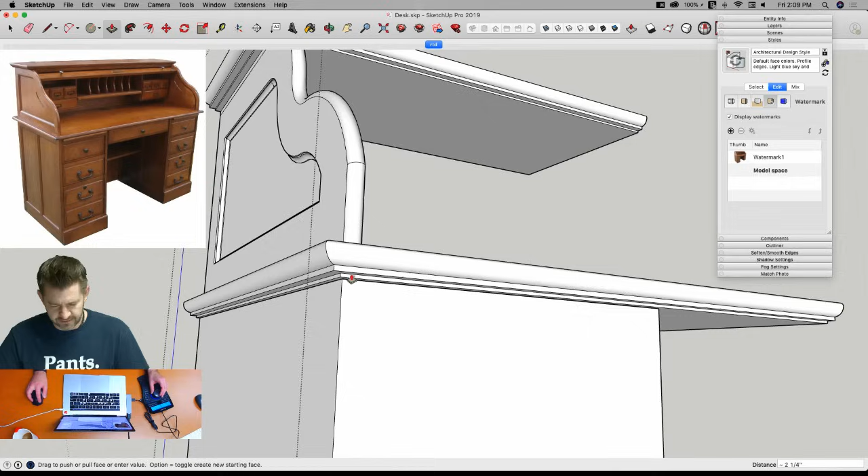All right, something like that. And then I can take this and just pull that up to the bottom of the desk. All right, I like that.

Okay, so here's a thing I'm thinking - modeling this roll top right here is one of the next things we've got to do.

I just splashed coffee in my own eye. Don't do that, then you can't model. Oh, I was trying to get out of it. I don't know what I'm doing. Now I'm injured, gotta leave.

Workers' comp. I'm gonna take this right here, and I'm trying to think of the best way to do this, because what a roll top is made up of is a bunch of small, longer pieces. So I'm kind of thinking of using an extension I haven't used for a long time, and actually I don't really know how to use very well - component stringer.

Actually, something else I'm realizing right now - correct me if I'm wrong - this should actually turn and lead back here, right? Because this roll top actually rolls back in and comes back down.

So I'm going to see - so this is 5/16. Drop that down there. Put an arc on here.

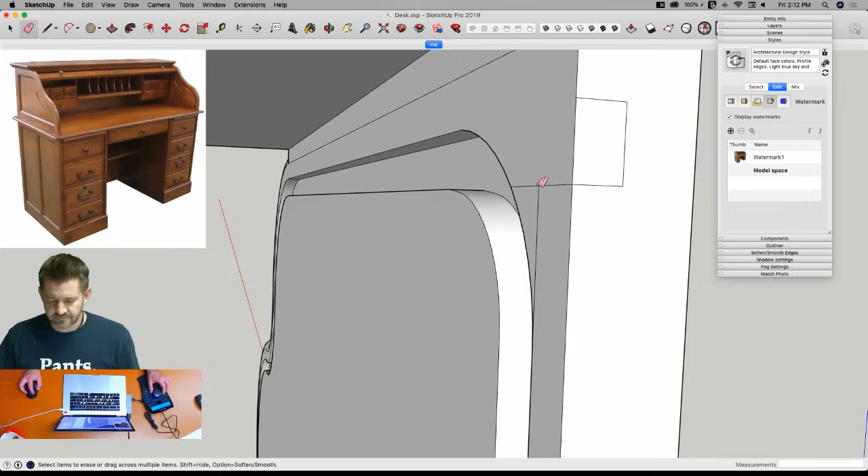Intersecting solid components in groups - if you have solid, is the question about finding the solid tools, or finding the solids? All right, explain yourself. Hey Nicholas, could you explain? Sometimes it's funny, but when people ask questions, they'll ask what they think is the most direct way to ask: I need a tool that does this. And oftentimes for people who are in teaching, education, support, will want to know what the case is, because the actual answer may not line up with exactly what you thought the best way to ask the question was.

It's very true. Finding intersecting - if you know the tools are solid, you can use the solid tools in SketchUp Pro to just intersect them. You can see the intersecting portion, that sort of thing. It doesn't just highlight where they overlap, but you can actually create a volume of the intersection. So that would work.

I know that, I was actually just thinking about that, because what I kind of have to do is look at this total length, if I extension weld that. Nope, I am gonna have to do math.

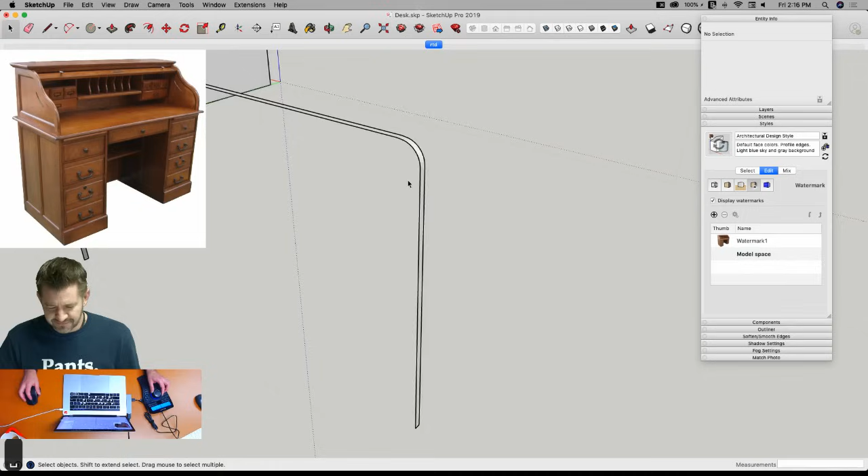Math made easy by Aaron - if there's a way to get around having to do math, I probably got you covered. And it's funny because I actually did a lot of design work, building design, truss design, worked for a component manufacturer, that sort of thing, and had to do more than a little bit of math on the fly. But it's never been a strong suit of mine. I will never brag on being good at doing math in my head. All right, so this is basically the profile we want to make.

So I'm going to make that into a group real quick. Bring that and, oops, I got lost. Slide that in right here. Alright, so that's half my roll top. I'm definitely going to have to do something up here at the top - I have a little bit too much gap there. Granted, it's going to fill up some of this, but I feel like that gap's a little big.

So I'm going to actually just do something like this.

YouTube wants to know where those trusses you designed are using math, just for future reference. No, asking for a friend. Even back then, I knew computers knew how to make math better than me, so I let the computer do the math. Make math, always, that's right. You make math, I make pictures - that was the deal, that was our deal. That's a good deal. Yeah.

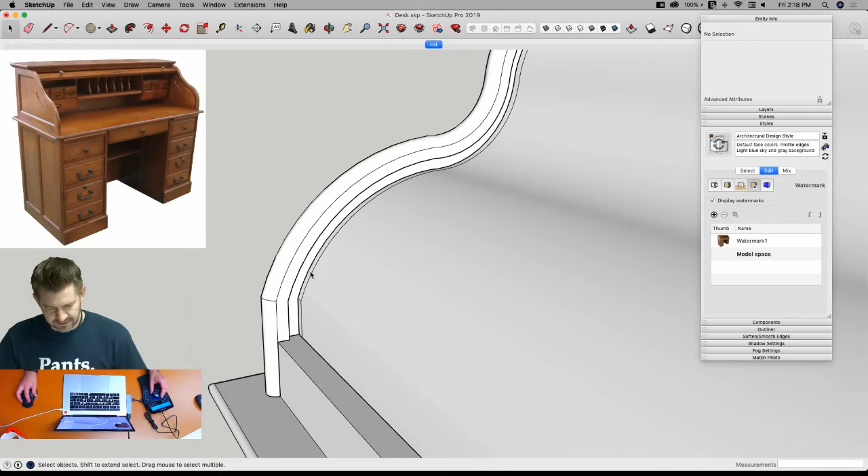So I'm going to come in here and make a profile out here. It's going to come across to here. All right, so I'm now realizing as well that this groove right here - well, I guess this whole thing - wouldn't ride inside there. So, but I'll come back to that. All right, so this is the board that has the lock in it, and the little handles will be on there.

Whoops, I did not realize that this was not grouped. There we go. All right, so there is our thing that I'm going to call a handle board. I don't know if that's what it's called - probably not, but that's going to be my handle board.

All right, so the other pieces - this is the spot I was trying to figure out. I don't know if they're half round pieces, but this basically ends up being, correct me if I'm wrong, a piece of fabric, or nowadays probably something like cardboard, but a flexible piece of material that those stretcher pieces are connected to, maybe leather or something like that.

That's right, trademarked, handleboard. So I think what I have to do here is create a series of those half round pieces. Yep, Dave agrees with you. You are correct, fabric. Man, I'm batting 1,000 here.

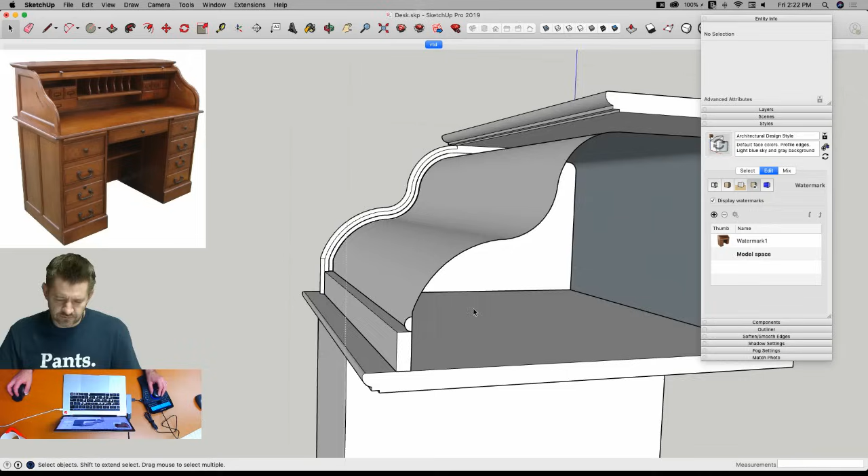So I think what I want to do is use component stringer to put this component along this line, and go maybe up to here. So I want to copy that all the way up there. So I'm going to save.

And I've done this before a couple times where I've grabbed an extension and installed it and tried to learn it myself live. I'm not going to say it went perfectly. I'll leave it there - near perfect, right? Well, it depends on your definition. Near is a relative term.

So I'm going to go to Extension Warehouse, and I'm going to grab component stringer - I think that's what it's called - from Chris Fulmer.

I'm going to watch the little video because, like I said, I'm pretty sure this is what I'm looking for. Yeah, because I can actually just take this, grab a path, grab a thing. Yeah, watch this, this is just going to go perfect.

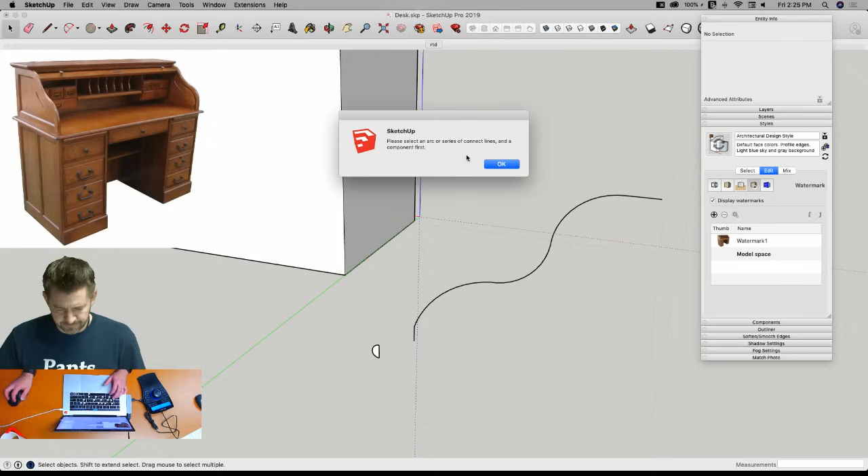All right, so I'm just going to do this over on the side. Take this - actually, I don't think I need to have them touch or anything like that. I'll take that and weld it. Go to extensions and find Chris Fulmer tools, component stringer. All right, select an arc or series of lines and the component. Oop, this means I gotta take this, make component, and this is my half round thing.

All right, so I should be able to go grab these, extensions, Chris Fulmer tools, component stringer. No. Okay. We're close. All right, I'll try it again.

Component stringer, reverse edges - I think I still want no. Component rotation, no scaling. I think sometimes I've hit 90. Well, that rotated each one 90 degrees off the next. Also not what I want to do.

There's only so many options here, so I'm going to get this right sooner or later. Still don't want to reverse edges. Scaling uniform, rotation 0. All right, so that was closer.

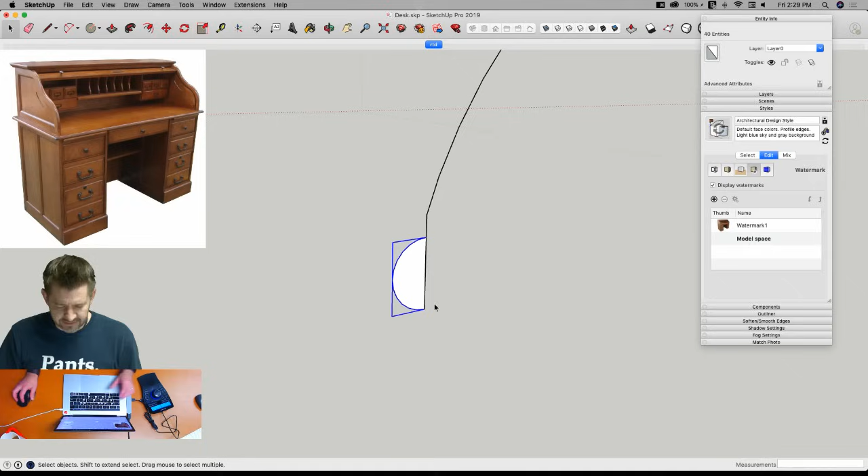I grab this one, Option, click it right here, and then I would grab this and drop it down until it hits the line. Then I would grab that one, come here, rotate, bring it down to the line.

Honestly, if I had started doing this when I started the download for the tool, I probably would have been done. But it's just not very much fun to watch. It's much more fun to watch me flail. Exactly, yeah, that's what we're here for. It's a good learning moment. Other people's pain, that's what entertainment's all about.

So I do know, like I said, I've played with Component Stringer just enough to know that it can do it, but I use it so infrequently that when it's time to actually do it, it's not perfect.

So, sorry, just give me one more minute, guys. Almost done.

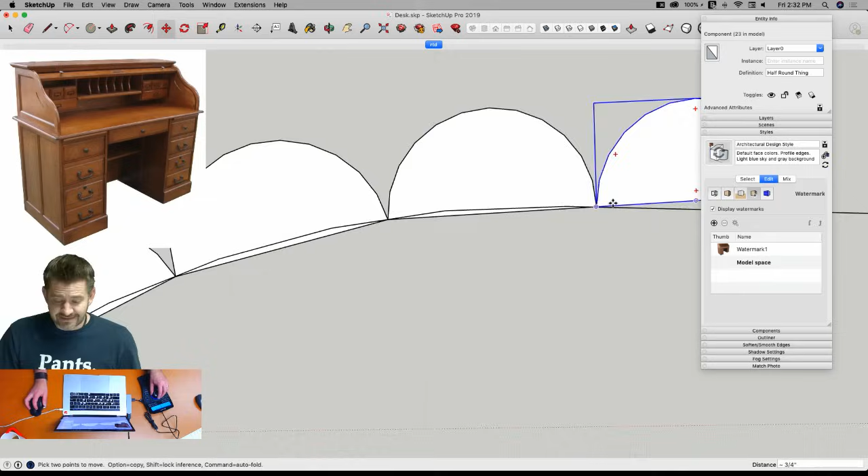Ooh, something iconic for July 4th. All right, fitting, a roller coaster. As long as we can ride on it. Yeah, definitely have to figure out Component Stringer by then, huh? Because that's like the epitome of repeating geometry.

Ethan asked if we had ever tried copy along path extension. That would be a great idea. Probably what I should have done.

Real versions of childhood toys. Ooh, like what? Go further with that. That sounds exciting. Nothing like Chucky, please. No scary dolls, I can't do that.

All right, so now that I got these all copied up here, I'm just gonna go into one of them. They are components, so I can grab one of these. I can pull through, hit the inside, and there is our roll top. And I'm actually gonna get rid of this, I just need this for reference, so I can delete that. And then this and this can go into a group together.

What did I just do? I just drew something weird. All right.

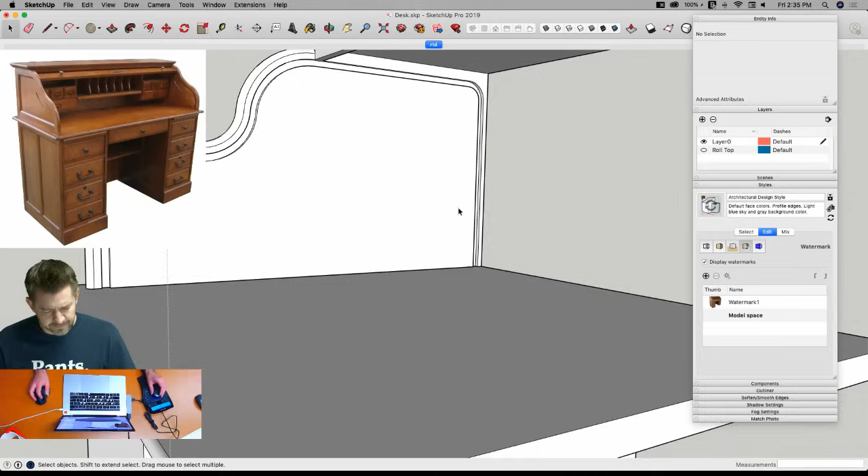I'm assuming that the back of the desk is right in here, and Dave can tell me if I'm right or wrong. So I'm assuming it goes something like this, and that section is what that shelf is all built on. Does that sound about right to anybody who knows about desks and stuff? Didn't answer quick enough, I'm assuming yes.

Okay, so I'm just gonna... here, ooh, Dave just chimed in. He's a little late though. He said there will indeed be a panel to hide the roll top. Right, all right. So Kara's live is monitoring the comments on the channels. I'm actually seeing them through our Restream app, so I get them a little later. So she's beat me to the punch on these.

All right, so I'm gonna come in, I'm gonna say something like this. Oh, so apparently the panel is a part of the gallery inside. Good to know. All right, thanks, Dave.

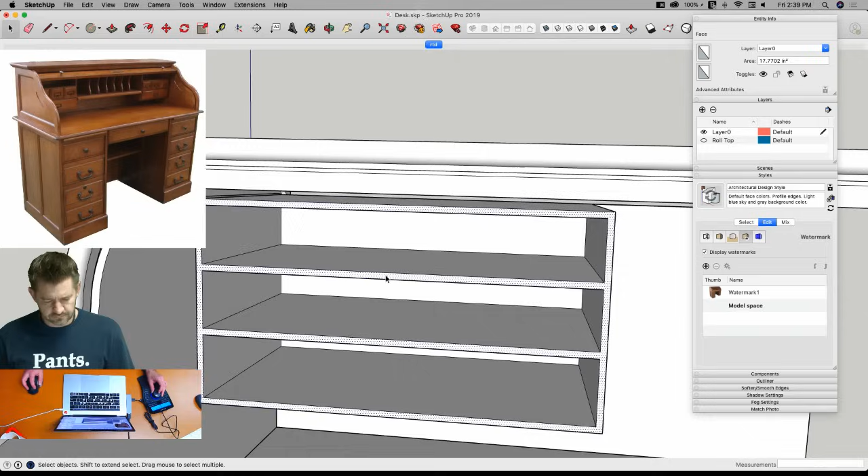YouTube wants you to animate this. Like this? The roll top, open and close. Yes, one could. You know, it's still on my list of things to do, to use like Fredo's animator or something like that. I just have not got to it yet. I want to, just don't really seem to have the time that I need. Or somebody could download it from 3D Warehouse and animate it for us. Boom, there we go, got it sorted. Looking at you, YouTube. See what you done did?

Alright. So there I'm just making kind of the... sure, fix it. Alright, so that's this section. I didn't put the drawers in yet, but just the geometry for all that.

One last piece I'm going to throw in here is this little mail sorter type thing. What'd you call this, Dave? A gallery? That's gallery, a collection of things. I just left context, but that's okay.

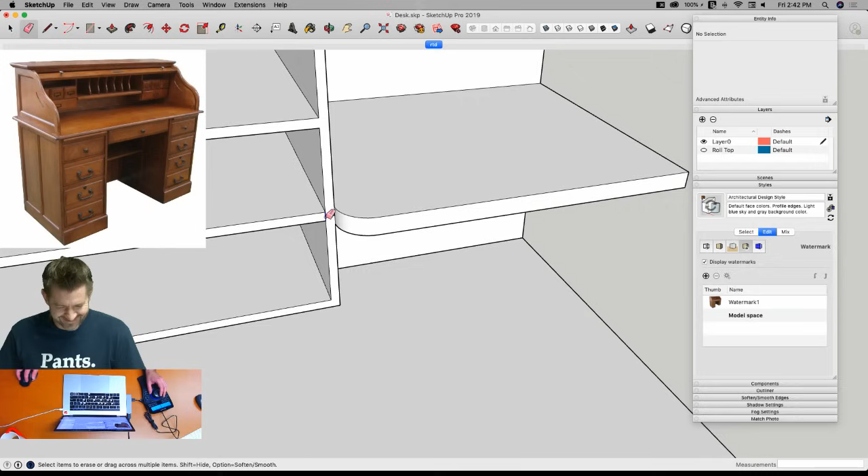Something like this maybe. It's kind of small, but I'm gonna say that's exactly what it looks like, and I did a perfect job of getting it. Somebody said it's your desk, so I'll do what I want. Exactly. All right, that looks pretty cool.

To just finish this up, we want these kind of sorting things, 1, 2, 3, 4, 5, 6. I'm gonna actually create those out of context because I want to create one that's a component and I can put it in here.

They're gonna come out to about here. I'm gonna go all the way up to here. Actually, I should do this lid piece. Should be like that. Group and save. Thanks, YouTube.

So that's going to go vertically up to where it meets that. And then it's going to have, let's see, I don't want to do this shape. I'll say it comes down 3/4 of an inch, comes up 3/4 of an inch. Let's put an arc right here, something like that, and I'll just make that 1/4 inch thick. I'll just make that a component.

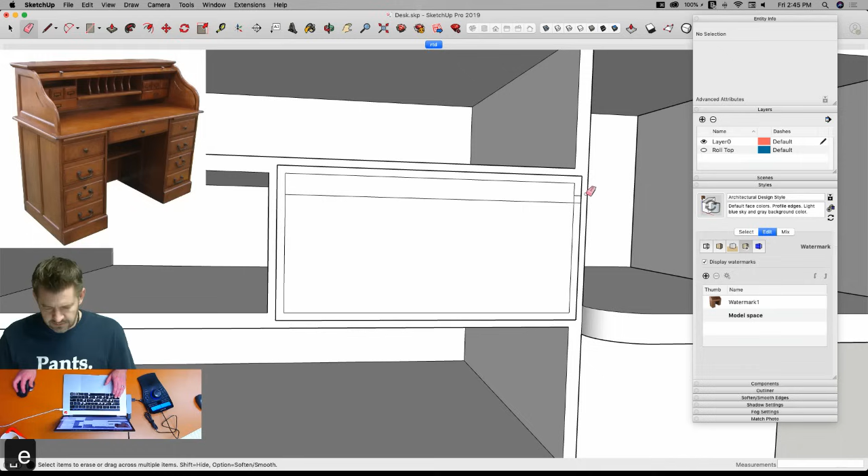Offsetting it to 1/8 of an inch. Same thing here, 1/8 of an inch. And then I'm going to grab all of that and pull it out here to work on it. All right, so this piece right now, here, this is going to come out a little bit. Just want to give it some depth. Something like that. That's the front.

Beauty. And then I'm just going to grab these 3 sides, offset those in. That, offset that, how far is that down? I'm gonna hit Option Offset to create a new face and push that up 1/4 inch also.

So again, not something I'm going to build off of, but enough to, well, I know it's a drawer. And how this is, so I'm going to do this too. I'm going to take this, do an Option Offset, another 1/8 inch, then grab the face, scale. I'm going to scale about the middle. Just pull that in a little bit. There we go.

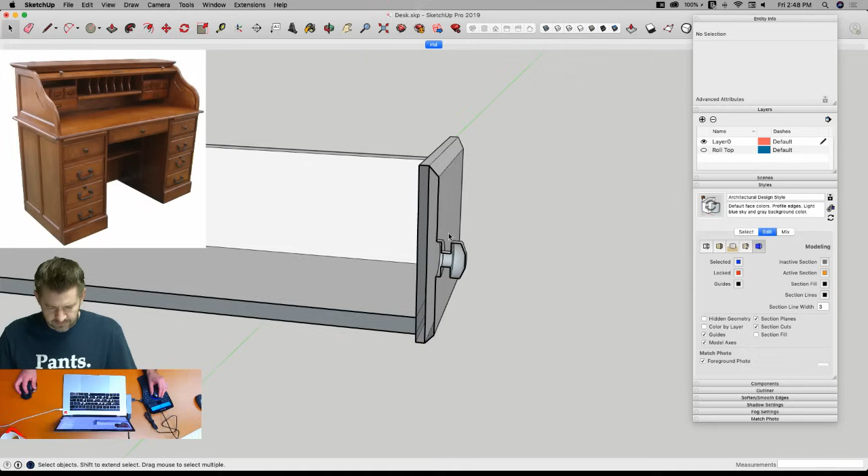So I got an issue here, and we're going to fix it. I got this extra surface right here that I don't need. I also don't need this surface. Oh, and I don't need this surface. All right, so now I can get rid of my section. Sections can be used temporarily like that. Make that a component. I'm going to call this my small drawer.

And I'm going to take that and I'm going to slide it in. I want to put it all the way to the back. So I'm going to use X-ray to snap it back in. Nope, at the bottom. I'm going to snap at the bottom because that's where I drew it from. And there we go. Now I can grab that. Option copy times 2.

Close, a little bit of an overlap here. If I look at my X-ray, the issue, and I kind of had a feeling I was going to run into this: these outside drawers are actually just slightly bigger than the middle drawer because I evenly divided and then added material to that division.

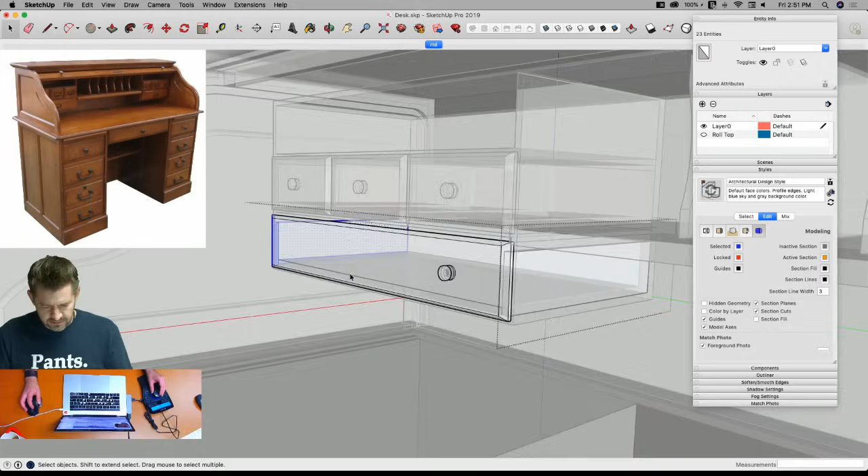And then I can grab all of this, that top section, move it straight up to there, and there we go.

And I can take this knob. When I move this knob, I want to move it by the top of this circle, because that's where it's centered, and bring it over here, and I could actually just align it even with this centerpiece right here. All right, so there we go. That's looking pretty cool, and I'm going to go so far as to call that done.

Oh, not done yet, hold on. I'm going to copy that knob because I like it so much, and I'm going to stick that onto our roll top geometry.

Maybe I'll scale that up a little bit, looks a little puny. Yeah, we'll center it vertically by grabbing the edge and aligning that to the middle snap point there. And we'll actually make it a little bit deeper too. All right, something like that.

All right, so that half of the top looks pretty solid. What I might do is before I copy it over, I might come into these different pieces and delete the end geometry, because it's going to make it easier for me to join that geometry together once I actually

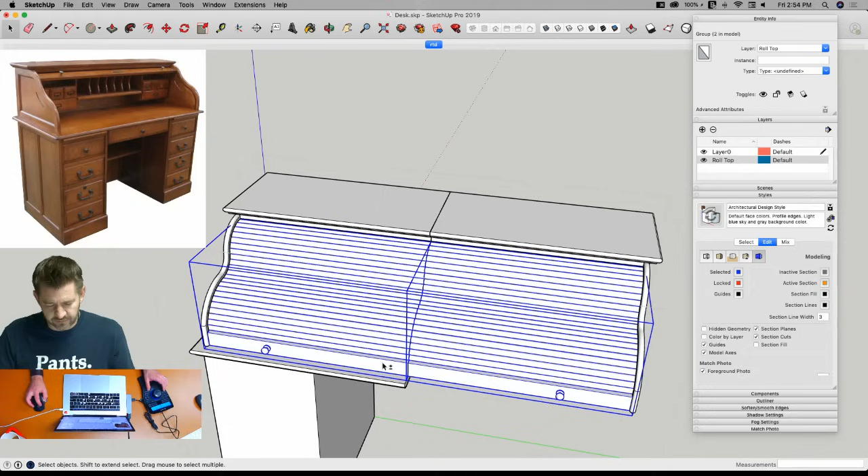So maybe I'll take both my roll tops, merge those together into a group, and then go inside here, explode these two groups, and actually take these two, make into a group, go into that, take these two, explode, and that's when I can clean up that geometry there.

It really, at this point, comes down to how much you want to keep those pieces separate, or if you're okay with merging stuff together right now. Since this is all out in its own group, the roll top piece, which is actually on its own visibility layer, rather than individually taking these two pieces and putting them together, I'm just going to take both of these, make a group of them, go in here, explode those, and then, oh no, here's what I'm going to do.

We just got excited. I'm going to take that, get rid of it, and I'm just going to grab all these.

Just use scale to pull those through to there. Oh, that's better than having to merge all the geometry together. Yeah, baby, that looks good.

All right, so if I look at this one right here, same thing here. Basically these two pieces have to join together. Just grab them, put them into a separate group, go into that group, explode these two. When you explode it, the geometry comes to the same context and joins together. So that's a question of just deleting like this.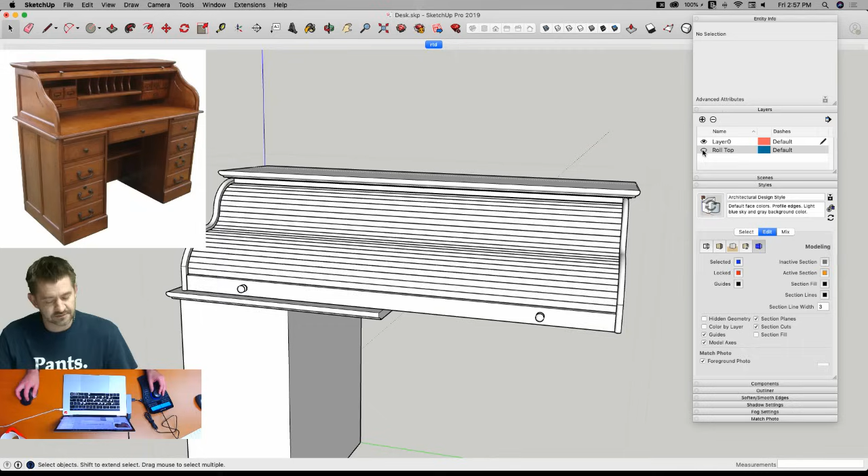There's our roll top. Look, it's animating. Woo! If you blink at the right time you can actually see it move. There you go, YouTube. I did it. All right.

Okie doke. Let's go ahead and, what time is it? 3 o'clock. All right, so we got about half an hour left. We can get this bottom section looking like something. If that's not a vague promise, I don't know what is.

All right, so I'm gonna come up. I'm gonna put a foot on here that's, we'll say, 3 inches tall. All right, I'm gonna pull that out a quarter inch, like that. And actually, I'm assuming we're gonna take that around this side too, so I'll pull that out also.

And then over here, this is kind of cool because it looks like what we've got is a little bit of an offset thingy here. So I'm going to offset this. Yeah, we'll do 1 inch. Do the same thing here.

Now, those of you who are astute at noticing huge differences in geometry will notice there's a 2-inch piece here as opposed to a 1-inch piece here, because what I did is just cut it in half and then offset both sides. So now I can just take this and scoot it over 0.5, then grab this one, scoot it over 0.5, and that gives me the same geometry there. I can just take that, set that in a quarter inch, quarter inch, and give me that look.

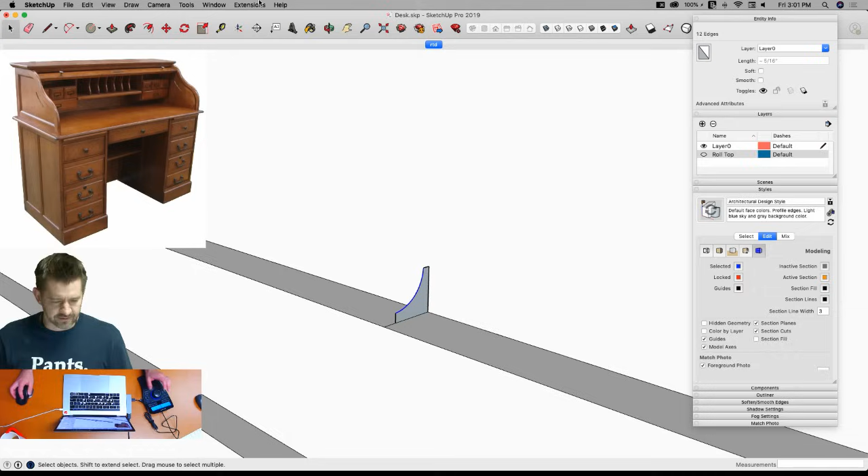All right, grab those lines, extension and weld. Whoops, too much deleting. Follow me with that. All right, that's that. What was this? Let's clean my desk off real quick.

All right, it's looking good. All right, keep going here. Whoops.

Throw some drawers in here. It does look like this is offset and inset, so I'm going to take this and start by offsetting that a half inch, and I'm going to push that back in a half inch.

Something like that. And then I can actually put my drawers inside of there. One, two, three, four drawers. So I'm going to divide that into four pieces.

All right, so that's what I got right now. I want to evenly space these this time. So what I would do here, because I want my drawers to line up right, I'm going to offset this a half inch.

There's quite a bit of space between these, but not so much at the top. So I kind of feel like that's what I want to do. I'm going to pull those back.

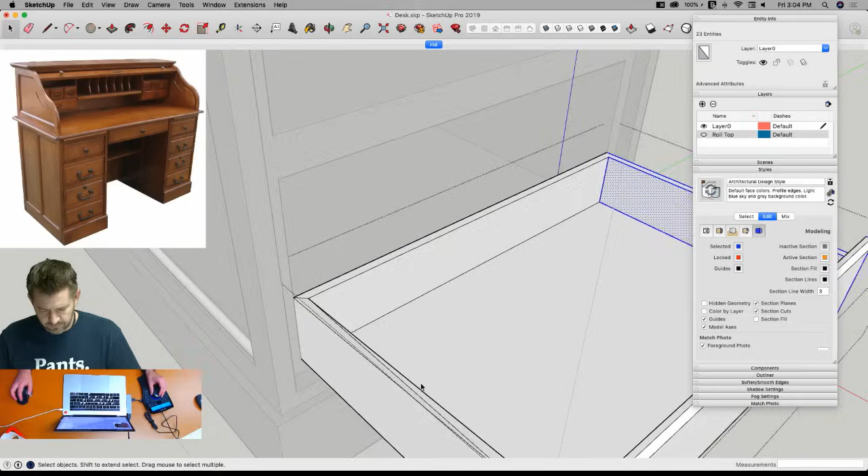There we go. What happened here? I did something wrong. Not sure what I did wrong.

I'm gonna go back to the source. I'm gonna grab the first one I made. All right, I'm gonna take that one. That's the one I want. I picked the wrong one last time. This is what I need.

All right, I'm gonna go into this one. I'm gonna grab this section on the side, pull that over to the corner, and then I'm going to bring, so I gotta figure out how much, what's this overlap here?

This is an eighth of an inch, so I go here up an eighth of an inch. That's where I want the top of this line to be, so I'm going to do the face of the drawer first. Grab just the top geometry and move it upward.

I'm having some snapping issues. What's the deal with the snapping? All right, why are you being like this? It's because it's Friday afternoon. Exactly. SketchUp is done. There we go.

SketchUp's on happy hour. And then I'm just going to pull this up shy of the top. All right, and now.

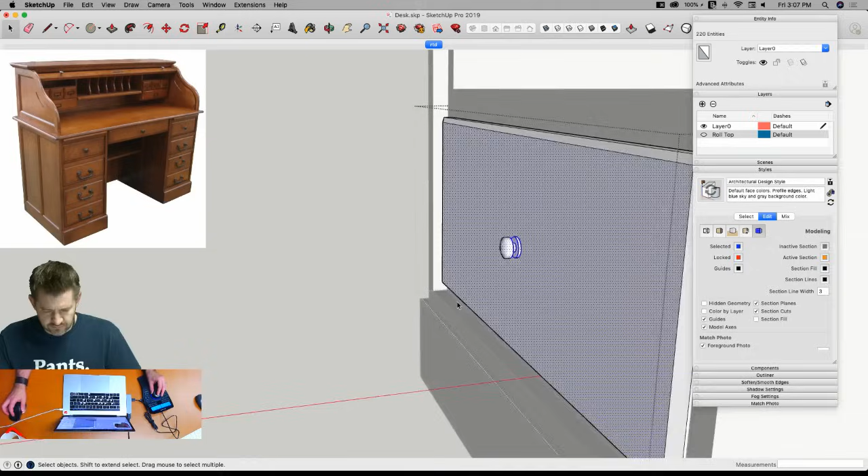And now I'm going to take these pieces off and use move to slide this out a little bit further, like that. A little bit bigger. Yeah, scale the knob up.

Back recentered. Where's center at? Right there. Center that vertically. Right there. That looks better. Nice. All right.

I'll take that then, and I'm going to turn on X-ray and use my... Yeah. Okay, so these could end up getting a little bit deeper. So there's my three drawers.

All right, and we need one more drawer. That's here on the inside. I'm going to go ahead and copy this over since that middle drawer spans the whole outside. I'm going to take all of this.

And all of these, copy them over, invert that, and then snap it back together.

All right, then I can take these two pieces, make them into a new group, again like I did before, go into that group and explode those two.

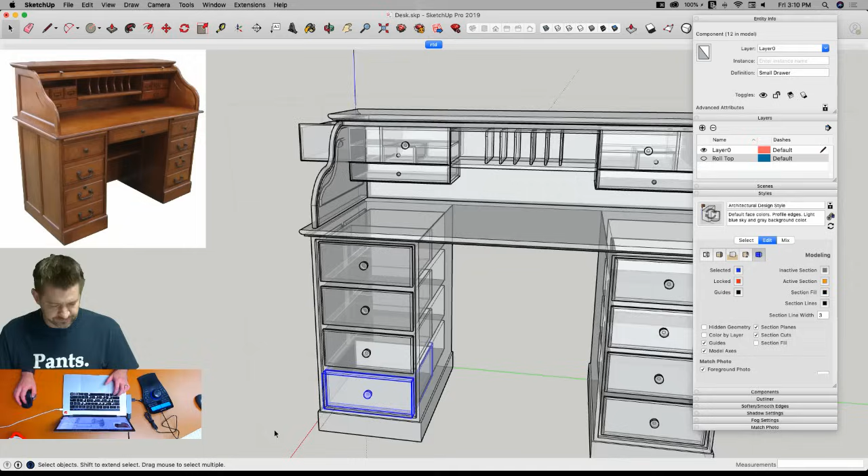Now I'm going to start undoing. Geometry disappears, geometry modifies, geometry goes back to normal. Okay, phew. All right, get out of here. And now I can say edit, paste in place to stick that drawer I created back in there. Good times, minor details - this is where hopefully my pain helps you learn.

All right, let's go ahead. While we're here, I'm just going to grab this geometry and make this drawer a little deeper. Ooh, that's a super deep drawer. All right, and now I can grab this drawer.

Another quick win. Option, copy, option. Look how quick that was. That was such a...

And because I learned it last time I did it, I can just delete this surface out first. And I can grab all of this, option copy, right click, flip along green direction, then go grab it by an endpoint. Look right there - just like I did before: select, make group, click into the group, explode, and then just to make it simple, we'll grab this and merge faces.

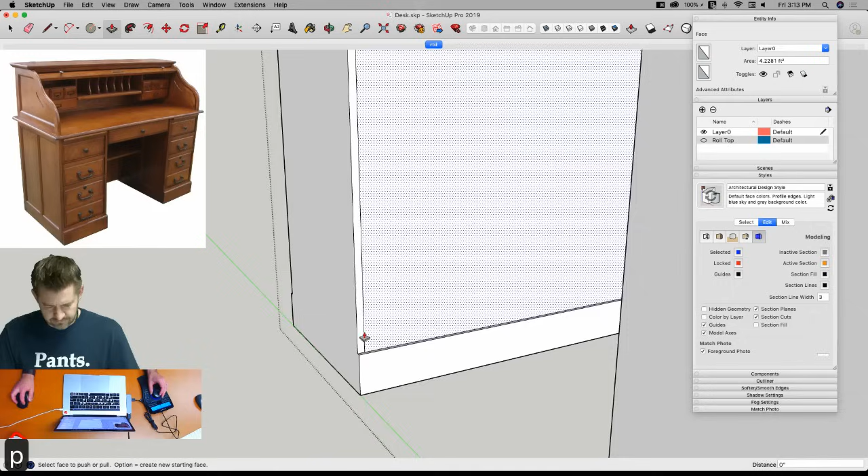We do need a back on here. So I'm going to come in here and let's see. I forgot how deep I made this little quarter inch. So pull that out, another quarter inch.

All right, and got that in there. Now I have basically a little - is there a term for this little shelf thing? I assume it's some kind of reinforcement, or maybe it's just for where you can rest your feet - but this little shelf thing in here, apparently it's called a save.

Oh no, I should save. Save.

Does anybody know this, like for real? What is this thing for? I did not make it high enough, but I had a desk that had one of these once, and honestly I didn't care for it. As far as I could tell, it was primarily for putting character features into your shins, because I injured myself on it a lot. Again, it's for cats. Guys, I don't have cats, so this helps me not.

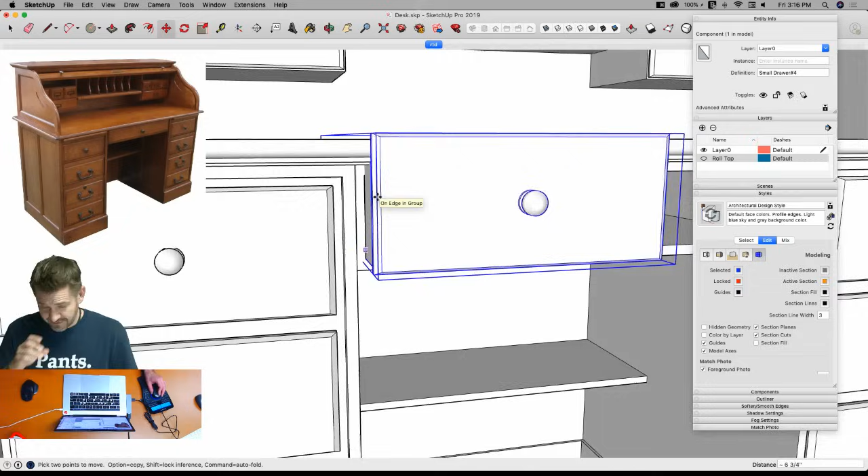Oh boy. Sometimes I like to blame that sort of thing on it being Friday, because it is Friday. But I can't always say that's what's going on - sometimes stupid happens.

All right, I'm gonna grab this face and this face, and I'm gonna bring them across - to, no I'm not. First I'm gonna get the face of the drawer where it needs to be, because that way the inside drawer is connected to the face of the drawer. So if I just get this where it needs to be first, I'm good.

So if I come this way - what did I do that? What was my offset there again? I already forgot - an eighth of an inch? Woo, help. Eighth inch, okay. So I need this to come out to an eighth of an inch. I'll pull it out to here. Start with that.

Here, just grab this face and this face - it's really the only pieces I gotta move. And that's gonna come out to there. And then at the top, this piece and this piece need to drop to here. All right, I can get rid of these lines that I put in just for temporary dimensions.

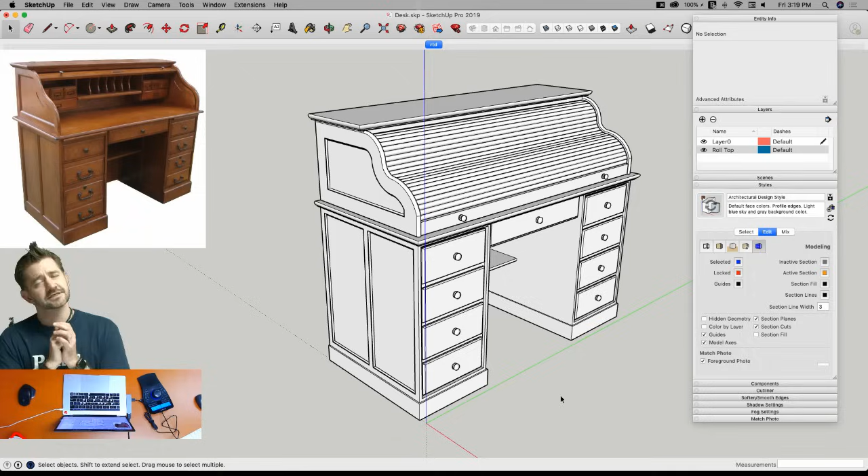Yeah, I think that's most of it. That turned out pretty all right. It's definitely a roll top desk. I could totally tell. I'm telling you, I can totally tell. I can see the animation happening.

So something to point out, we do still have this match. Let's compare this to the match photo real quick. I don't feel so bad about that. It's not terrible, that's pretty good. Again, there was some distortion in the original image. I was able to identify that, but yeah, that's not too bad.

If you do have a job where you do a match photo at the beginning, the way to get rid of it, I just point this out because many people have asked, is just to delete the scene. So right here, if we come into match photo in our UI, it's going to tell us that we do have one in there right now. We go to it, we can actually manipulate that, but if I just right click and delete that scene, our match photo is gone.

So when it comes time to get rid of it, that's how I take care of it. Same with our little reference photo in the upper left corner. I can just go to Styles, Watermarks, select it, hit minus, and we're back to just a nice, clean SketchUp model of our roll top desk. Roll top.

Awesome, yeah I saw that. You're right, it did actually have kind of a panel in here on the inside. What I'm wondering, what I was thinking might be kind of cool to do.

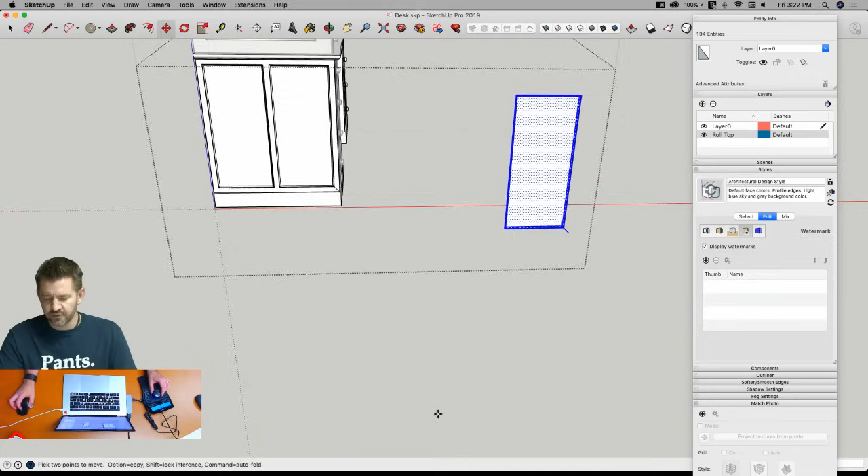So I'm going to put it right here because I don't want to have to copy it again. I don't want to pull it out of the model again. So now that I have my one copy, I can just take that, copy it in here, drop it right like that. Oops. I can delete this panel, and I have that in there. Ooh, it goes too high.

Undo, undo. All right, so let's make a modification real quick. So put this right here. I'm going to take this geometry at the top, drop it down inside like that, and now I can take it, option copy, stick it right there.

I have to force that cut. There we go, that's all it was. Get rid of this, and then take this.

I can flip along the green direction, and put it on the other side of the inside, like that. Again, the geometry didn't cut for whatever reason, but I can trace one side of it to force that cut. And there we go. I know it looked like there were 2 panels, but I've got a thing going on here with this cat shelf, so I'm only going to inset one section there.

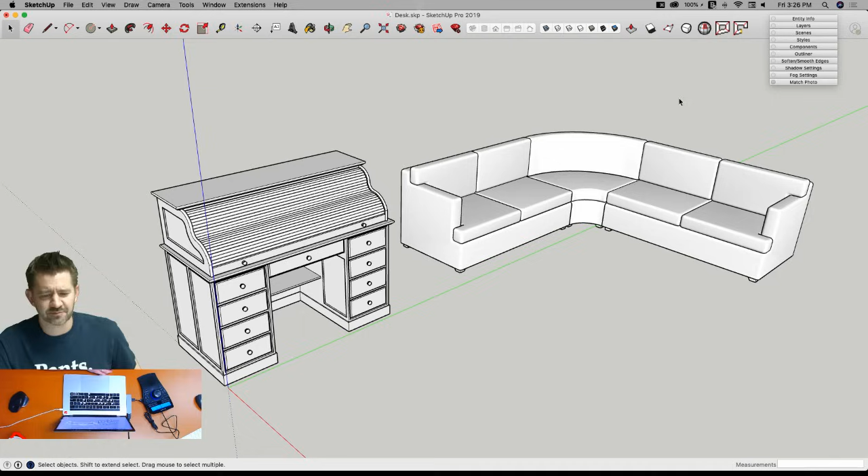So what field of view does is very similar to a camera, it's part of the camera tools. It lets you warp how distorted that field of view is. Generally speaking, the default for perspective view is about 35 degrees, and this usually gives a good fading off into the distance kind of thing.

If you drop down closer to 0, you're getting closer to that parallel projection view. 1 is as low as you can go while in perspective; parallel projection is actually 0. But you can see as you increase or decrease that view, you can go pretty far and seriously distort your models. Field of view is a great tool for matching the look of a photo.

So if I created a model of this desk and I want it to look just like it did in the photo, I can use my field of view to match up there. The place I see field of view being most useful is if you have to do images of inside buildings. 35 can end up being kind of narrow, where if you're standing inside a room looking across it, all you can see is the opposite corner. But with field of view, you can play with that and distort it so you can see more of the room from that same vantage point, because sometimes you can't move farther back in a room, you hit the back wall and you're there. Field of view lets you see more from the same location.